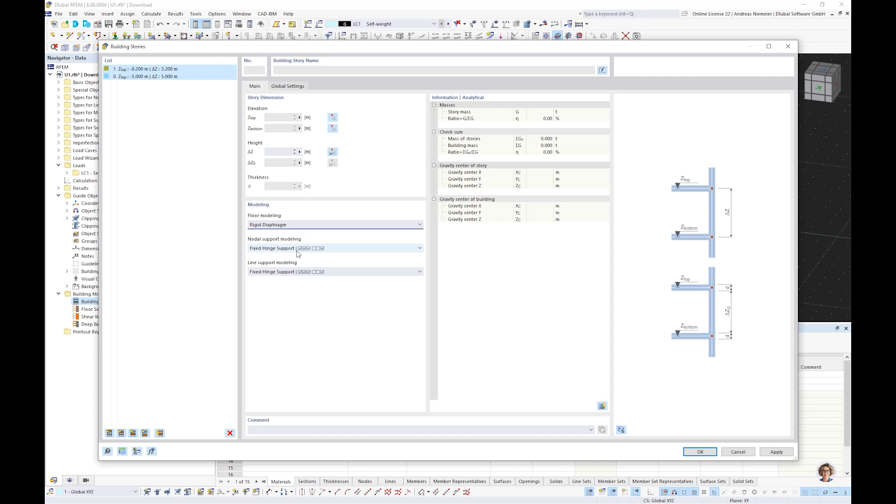And further I specify, program, please consider the floors as rigid diaphragm in the 3D structure, and additionally the slabs or ceilings of the first and second story should be supported on hinged supports. Of course you can select something else. And now I confirm, and no blinking or highlighting info will appear. You will only see in the middle a dimension that shows us the height of the stories, not more and not less. And now we can start modeling the building.

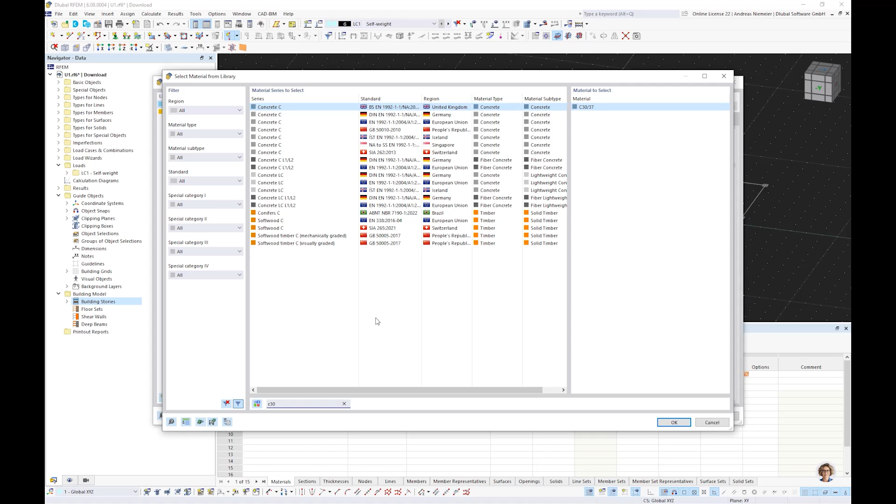For this I use, for example, the column command. We know the column should be a concrete rectangle, so I go into my library, select here a square rectangle, maybe with a size of 300 and a concrete C30. Let's select it here, C30, and you see the program directly finds the suitable concrete for this keyword, and we confirm this. It's going gray, and now we can start modeling.

The exotic thing now is, the program asks me here with a small dialog, do you want to have this column in story 1 or 0 or in both? In my case both, and now I pick it. Oh, I can't find the snap point, so like in a CAD program, you can activate it here. And now let's go to the other places, and if it's easier we can use a top view and jump around.

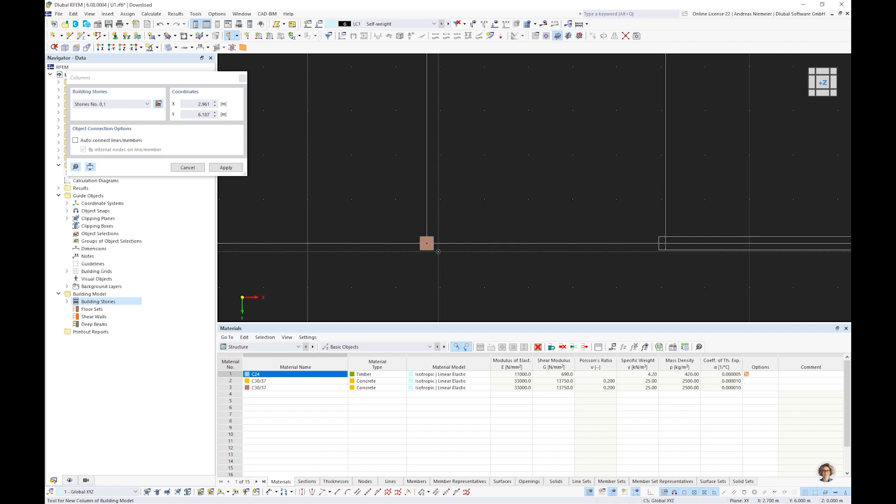Of course you can also copy if it fits. We have no rules for this. It's still like RFEM, where you can do everything in every stage, but now have a look if we change to, let's say, isometric view. Oh, maybe make this box here. You see you have the columns here, with the right length, 5 meters, 3.2.

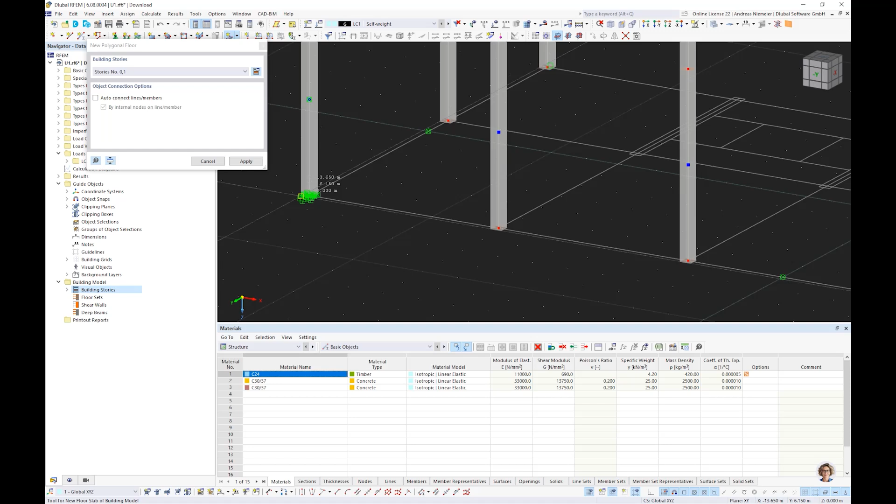The same for, let's say, the ceilings. We can take here maybe a polygon floor plate, and we specify here, for example, C30 and a thickness of maybe 22 centimeters, and go. And now let's say we pick, for example, the corners of the building, and maybe we realize we need it only for the first one and not for the others, so we can change it during picking, because the program will realize it.

And now you see we have this ceiling inside, also with the opening for the stairway. If you want to do the same for the top, we open the command again and say now maybe the upper story, and we pick the points here, and maybe this corner point here, and right click. Now we have the upper story.

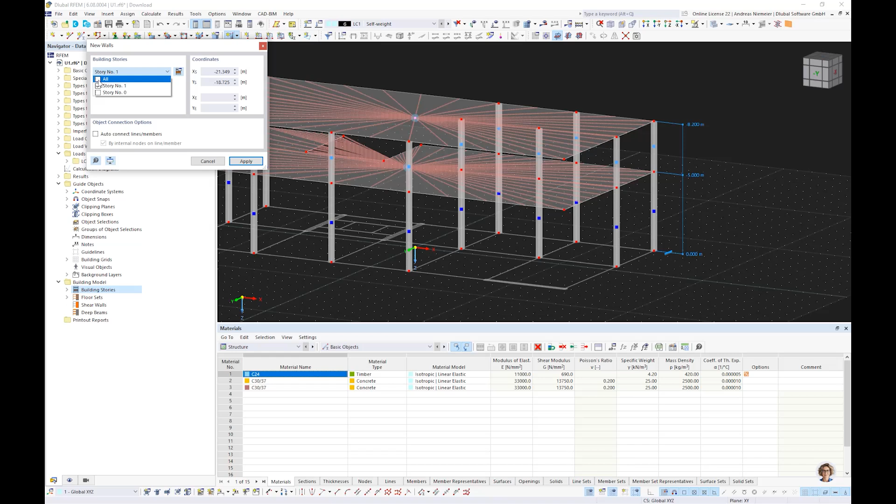And now we see, oh, we have also walls here. No problem. There is also a wall command where you can select a different thickness, maybe here 24 centimeters, for concrete. And if you pick it, you can say for which stories. I say for all. And now we define the wall should run from here to here, and the same for here to here, and maybe the last one from here to here.

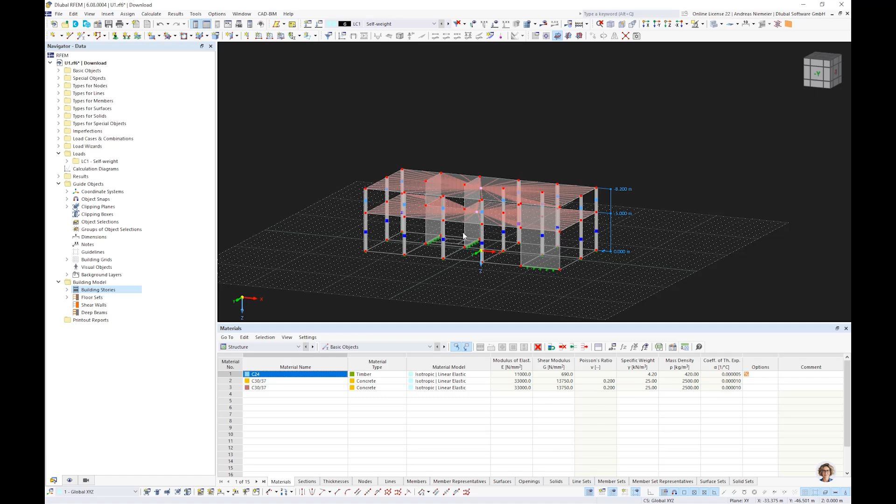So easy it is to define a building with walls, ceilings, columns, and now it works like before. We can apply supports, so for example here also nodal supports. Maybe here, so that we can grab all at once. So this is it, not more, not less. And of course we can start the calculation.

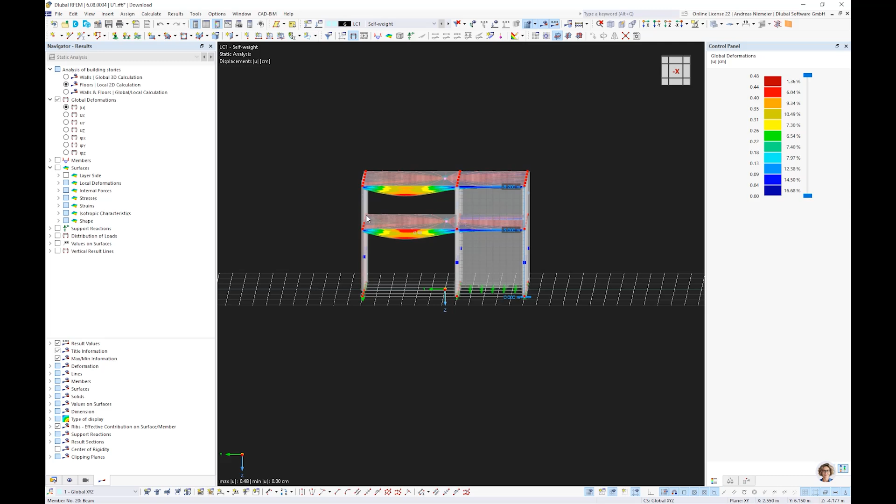And you see the program is dividing the calculation job of load case 1 into 3 parts. Why? This you will see now in the results. If I scale everything up, you see here we have 3 types of results: walls, floors, and both together. And this is now the way of thinking like a building. You have now, for example, here only floors. This means the program interprets the floors as a separate substructure. It calculates the ceiling with separate supports and separately.

So I get for these elements only bending moments, but no membrane forces, because I assume these slabs work rigid in plane, so the main structure is working, but this ceiling itself I calculate separately. And the support reactions from the floors I transfer to the walls, so that I can calculate the core of the building. This means in this model we have 3 calculations: one for the first ceiling, the second, and for the walls itself. So it's separated, and this ceiling is not hanging on the top, for example.

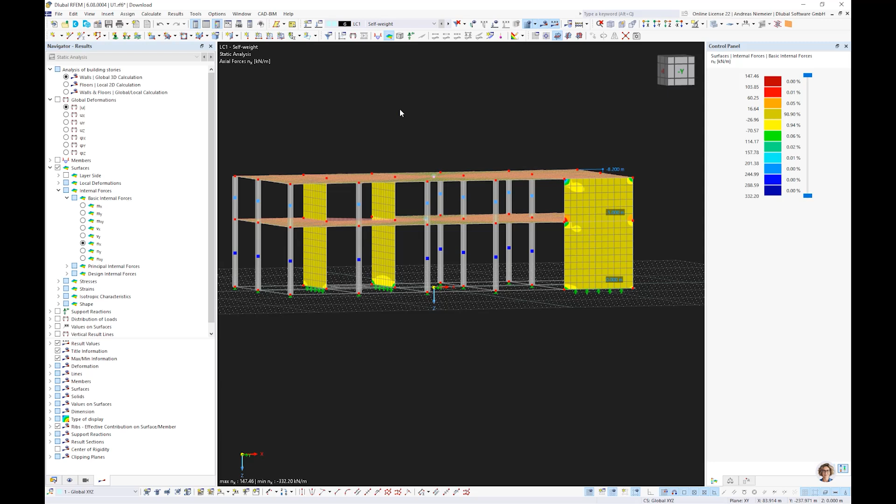So now let's extend this example, and I prepared something. So I close this and I open a more exhaustive example, called building model. So here you will see the same building with more stories, with different story heights, with a bottom floor, a ground floor, some regular floors, and a roof floor.

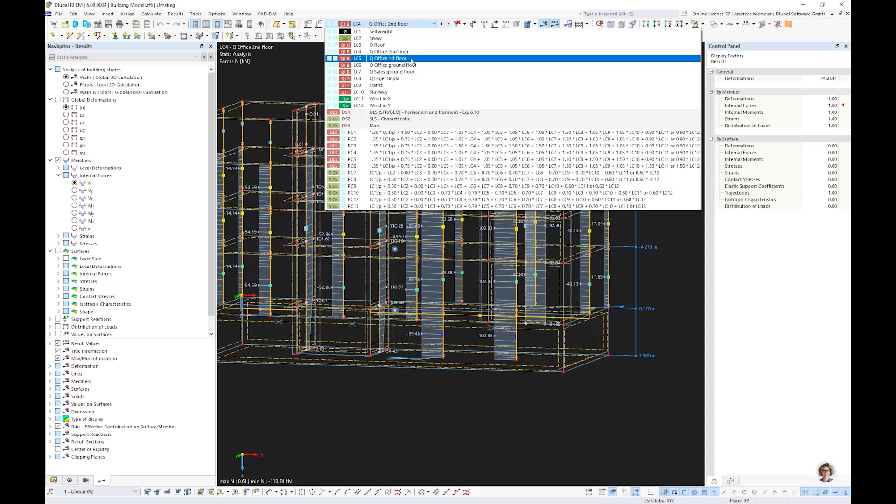And you see also here, for example, the increasing normal axial force gradient of the columns, because I'm visualizing the wall result. The columns also belong to it, and here we have our slab or ceiling, where you see the ceilings with deflection because of snow, but it acts separately. And if you visualize the normal axial force, you see the lower slab has no effect on the upper. For example, if we show a live load, you see the live load from this ceiling is going down but has no effect upwards. So with this type of calculation you can control the flow of forces.

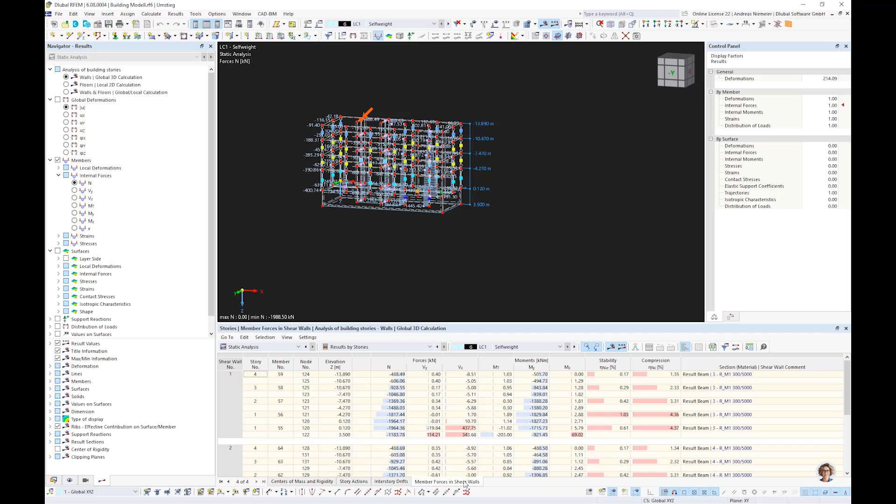Further, if we watch here, for example, again this self-weight result, you get it not only graphically, you get also a table for this result. You see here in static analysis we have the way of thinking not only for members, surfaces, solids, but also for stories. The program gives you information about the mass per story, the center of mass for every story and the center of rigidity for every story. So it calculates it in this separate task. Further, you get for every wall in this story, if you specify it, also forces.

So how you can define a wall. Here you see in your building model we have not only stories and floor sets, but also walls and deep beams. In this case I defined 3 walls. They have a section like a beam, and one wall is this, and this in front here.

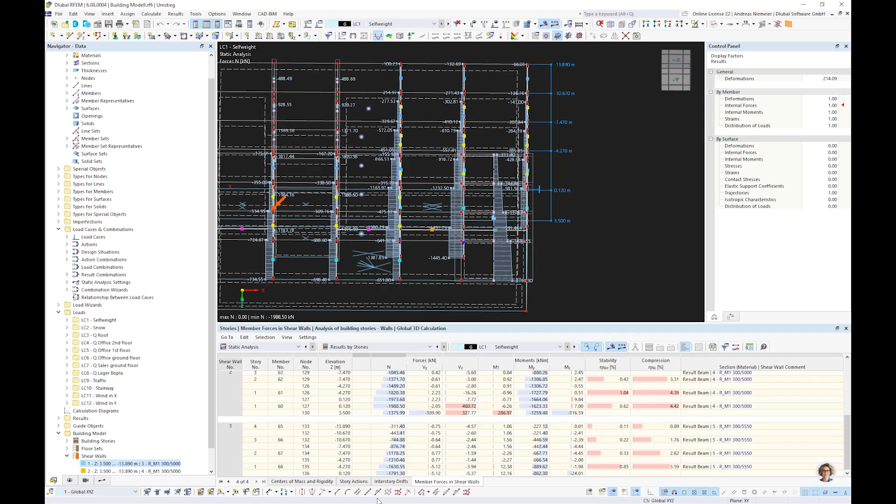And if I define it as a wall, the program interprets it like a beam. And all these forces are logged here in this table for every load case. You see the increasing normal force in load case self-weight for wall 1, wall 2, wall 3, and you get story actions.

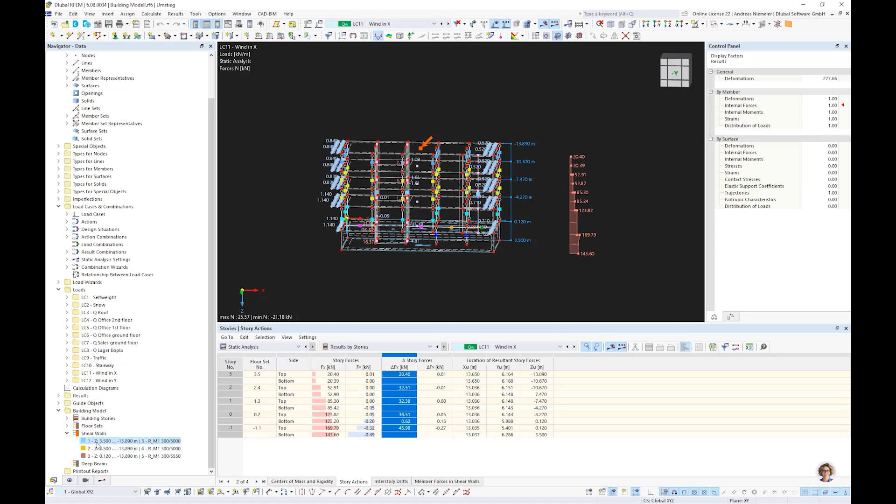If you have stories in between that need the transfer, or the reaction of deflection or the stiffness of the floor itself, you can control it here by defining if it's rigid, not rigid, or semi-rigid. So all these options are available per floor set. So this brings me to the next point.

What if you have a more complex building that is not only a story-wise building with ceiling, column, and so on? Then of course you have to take all calculation options and consider stages in between. For stages we created a further add-on, but to explain how this works, I prepared a model. I called it construction stages, and this should give you an idea of which types of issues or challenges could happen when designing buildings.

Here I have a simple building. You have columns restrained at the bottom, a beam that is supported hinged on the columns, and a timber roof that is also supported hinged here. If you look at the forces from self-weight, at first everything looks nice. You get the increasing normal force diagram in the columns. But what is a little unclear is why I get such big compression forces in the timber beams from self-weight, even if there is no load on it.

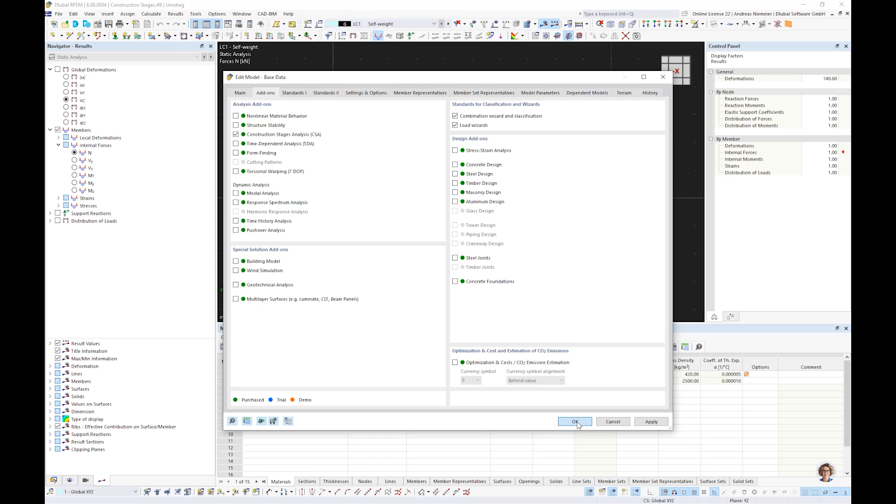This happens because the massive concrete beam is bending through, it pulls down the roof and it acts like a truss, and the result is that this truss beam here has tension, which is a little bit unreal. And this is exactly the point where you say, I cannot model everything in 3D. I have to take care of what comes first and what comes afterwards. And for this we implemented stages. Such an option existed in the old generation, but it was restricted to third order large deformation analysis. Now it's fully integrated in the program and open for all calculation theories.

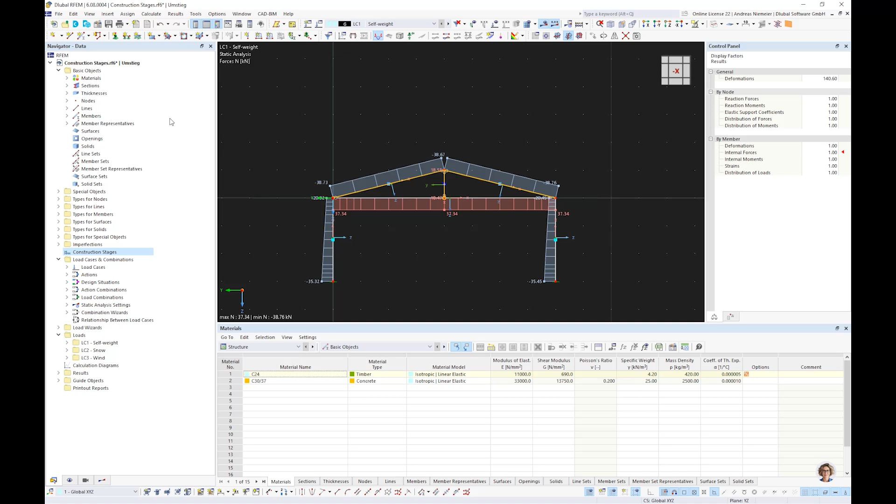How does it work? At first we make a stage, let's say column. In the column stage we have members and nodal supports. The members are clear, these 2. Supports also clear, these 2. Then we have the next stage, let's say the girder. Here we assign, it's really easy, it's like bricklaying. The next is roof. So I selected these 3 stages with these elements. You can visualize it too: column, maybe I hide what is not active, girder, roof.

Now the program has to know which loads act on it. I want to design column stage, girder stage, roof stage, and I expect that in stage 1 only self-weight and wind act on the columns. In girder, wind acts additionally, and in roof snow and wind act. And what happens now? The program creates load combinations for every stage. So you have a separate column for stage 1, stage 2. In stage 1 we get only self-weight and wind. For stage 2 we get self-weight and wind. For stage 3 we get self-weight, wind and snow. And it's that easy.

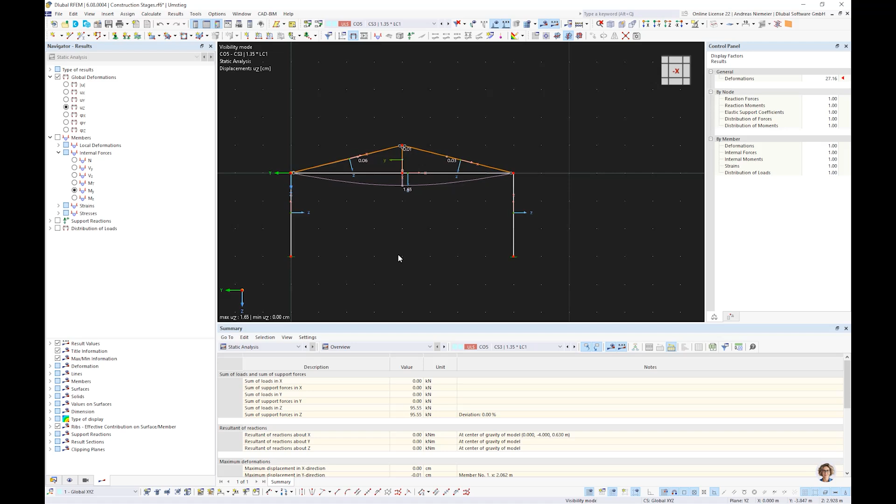So when I design this design situation, the program calculates it for every stage, and it cannot calculate all at the same time because each stage is the basis for the next. So if I calculate stage 1 only for the columns with wind, they are loaded and will be deflected. Then we place the beam on it, it will be loaded, and finally also gets its deflection. Here you also see the camber, and on this deformed state we finally define the roof for construction stage 3. And you see now in this type of analysis we have no tension force in it.

And this is what I want to show you. RFEM 6 gives you now the option to work like this. You can really define how you assemble it on your building site. And in comparison to RFEM 5, you now have the choice to use geometrically linear analysis, second order or third order analysis. It's even possible to say the stages themselves should be analyzed according to third order.

And the individual load situations on these stages should be calculated linearly. It's also possible. Then the program changes the basis of this. So, further, this was the example: think like a building and interpret it. If you, or we together,

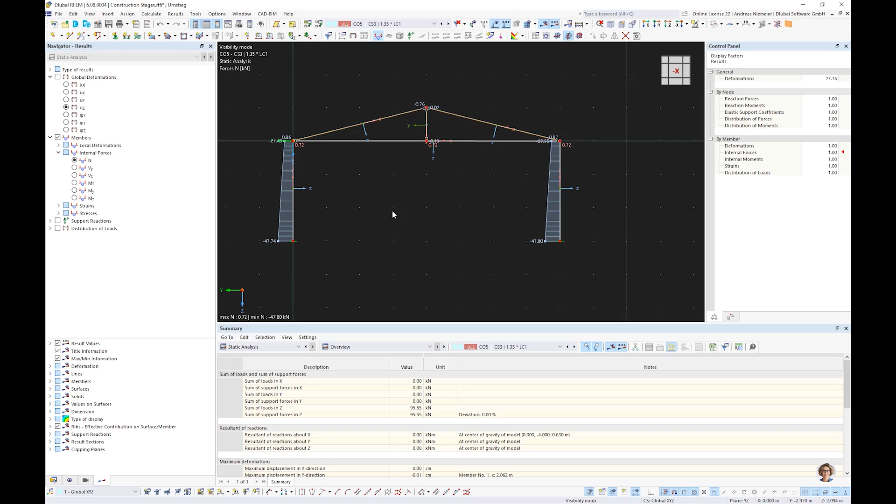come now to the next point, and this means efficient usage of couplings, because we coupled here the stages, so construction stage with load, but there are more couplings possible, and RFEM 6, or the new generation, lives from it. This means I close this example and open a new example.

What I want is to take over reactions. For this I have the ceiling above the first floor, and the second model, the ceiling above the ground floor. To use the space of the monitor, I remove the spreadsheet and organize it in these two views. So we have here the first floor, here we have the ground floor.

What is the difference? Let's go through the model. If we take a top view, you see we have a line support here, so we simulate a wall. And we have a load case self weight, we have a load here, a load here, and a load here, and all will be combined. In this model, from top view, we have no wall below, so this is one big room.

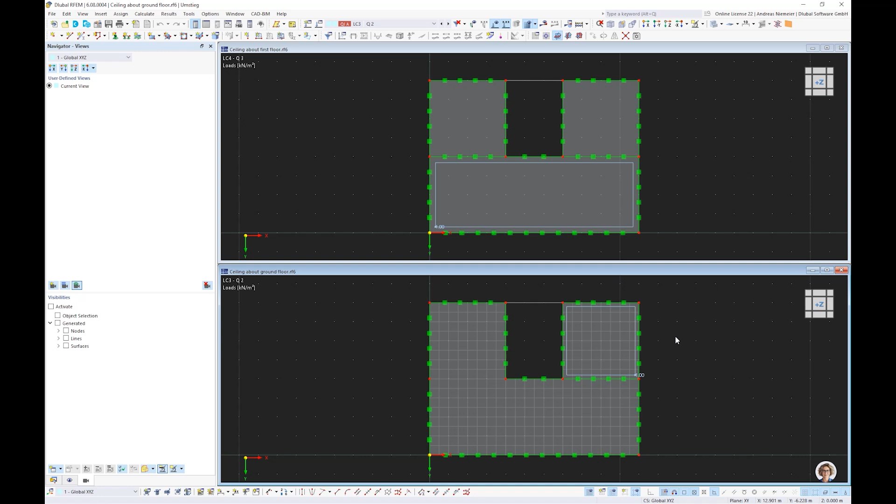And if you take a look at these load cases, we have self weight, one load for this room and one load for this room. And now the question appears: if I calculate this structure here, I get support reactions for every load case. When I activate it, we get deflections and of course also reactions. And now we have to apply these reactions on this model here.

For this, I have to think about how I want to bring it in. I have here two basic independent load cases and I copy it 3 times and say, okay, this is 3 from top, 4 from top and 5 from top. If you wish, you can also sum it up. You will directly see what happens now.

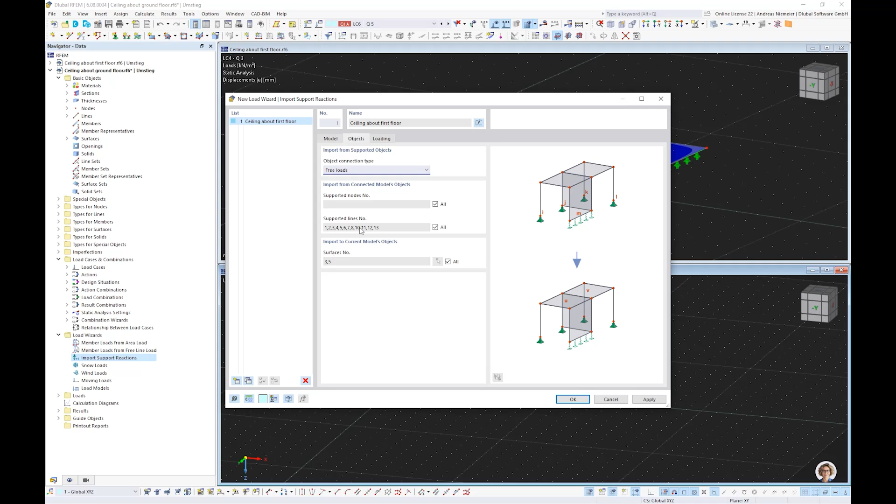You can decide whether you want to import support forces as object loads or as free loads, from all supported nodes and lines, meaning these lines and nodes, and on surfaces 3 and 5, meaning these surfaces. See, in comparison to RFEM 5 we can use nodes and lines without exotic connections.

Further, you can define the automatic transfer to load cases, which means load case 1, surface load, should run into load case 1. The other 3 load cases should run, manually, into 4, 5, 6. So here you really can decide which load should be transferred. You see the program visualizes it with a question mark, and if I calculate it, the program will take the reactions from the upper model and define them as loads on this one.

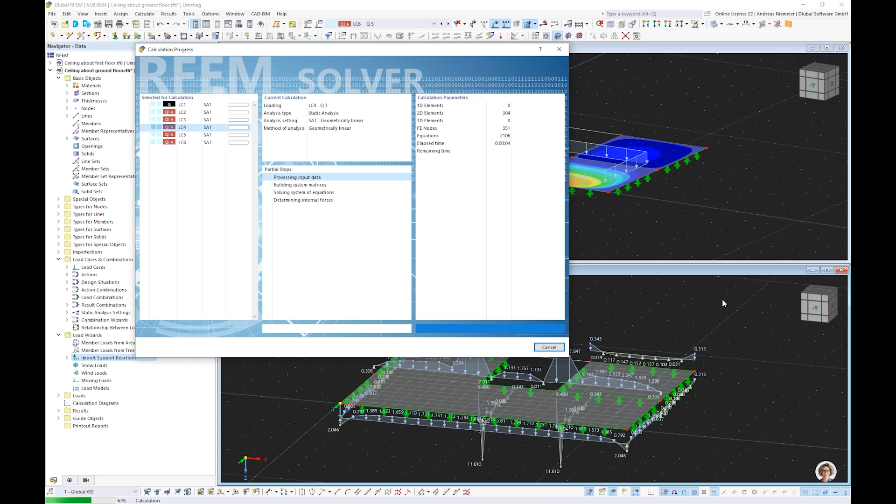Use connections efficiently. This is the point I want to show you. You don't have to write anything, it's done automatically. And what is really nice, you see the surface weight clearly, it's a permanent weight, and also in this case where we have a wall on top but not below, you get a load here as a free load. Here we have the loads from the separate load case, from this room, and from this room. And this is a really efficient usage.

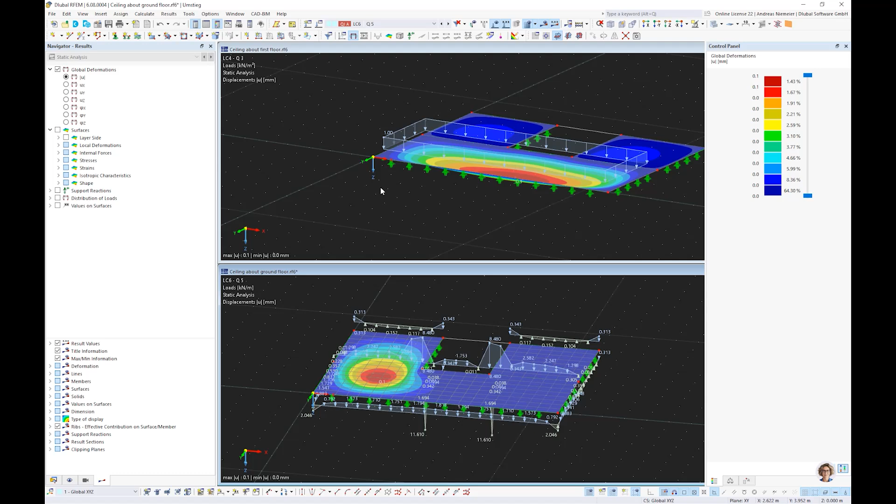And what is also really a difference to the old generation: if you have the situation, for example, in the permanent state, we have a load from the roof. So for example, I use a standard load with 1 here and here, and we also have a horizontal effect, maybe in X.

Let's use here 1, and here -1, so we have some roof load effect. You specify now in the wizard, program, please use for the permanent state not only Z direction, but also X component, and confirm it. The program wants to delete results, yes, we have to save, clear.

And now when we recalculate, the program is using the data from the model above, also the horizontal stuff. So it calculates first the floor above, and then uses these results in the lower one. And you see now in load case 1 we have also this horizontal effect in the forces.

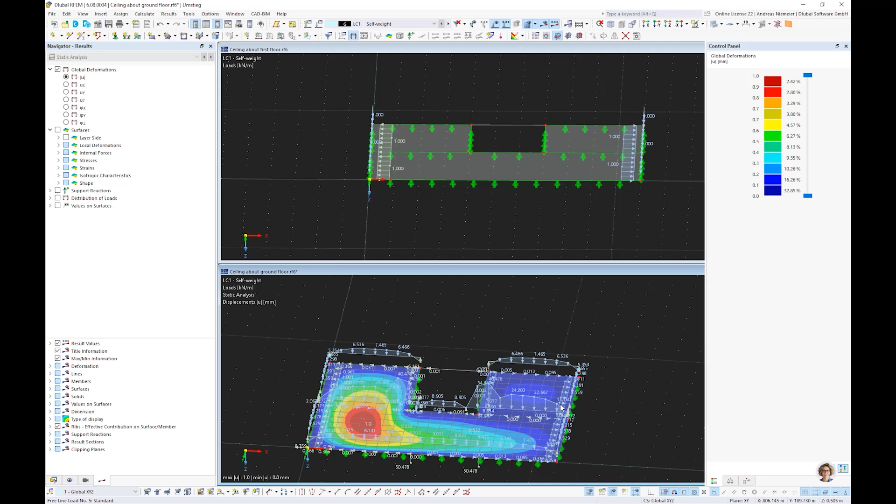So this could be quite efficient in your work, and if you say I want to freeze this, no problem, go here to disconnect, disconnect dependent model. Then the program gives you, let's say for this load case, free line loads would have no connection to something. So, efficient usage of couplings - you can use update, but you can also break the update.

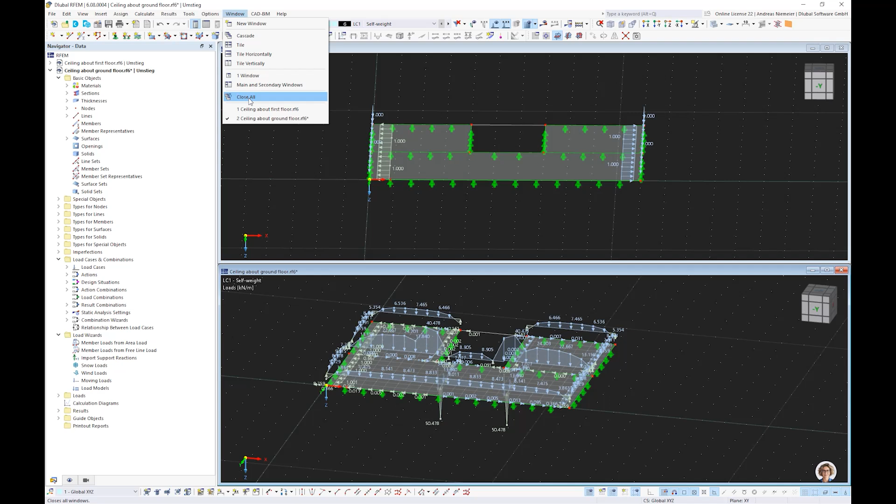And now let's come to the next coupling. Completely different topic, but it's also coupled. For this I close all and open a new scheme.

Let's say you have to design a user-defined cross-section from aluminum. For this I open our cross-section modeler. I call it UU1, for example. In comparison to our old generation, we had shape thin and shape massive, two programs. Now we have only one, and you can decide here massive or thin walled. Let's start with massive and create a user-defined section from aluminum that is extruded.

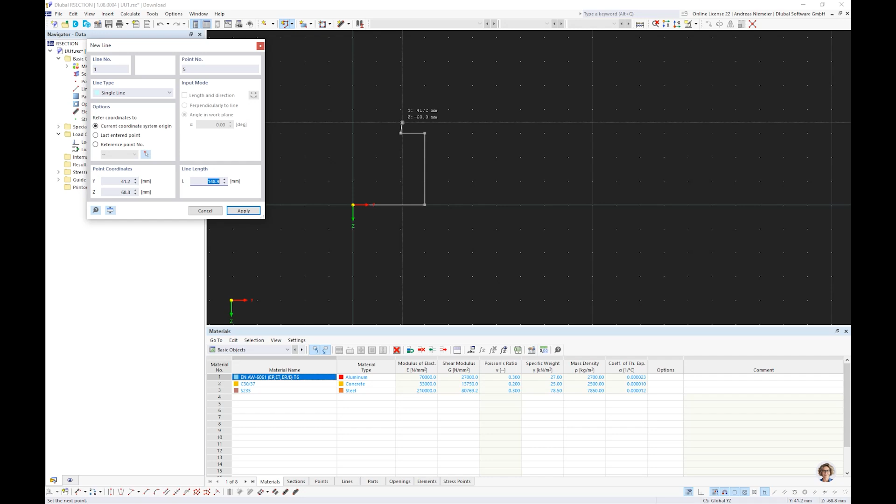For this I open it, specify the material, make a new row and write here maybe EN AW-6061 and use such a T6 material. Now we can start modeling this section, and of course you can do many things, but I use these grid points. So we have a line with 60, 60, 20, 20, some section like this. This is now a polyline.

I can extrude it, so you have functions to extrude it. Let's say we have a thickness of 3 millimeters, so we extrude 1.5 to the left and 1.5 to the right. The center line we can break, and these two lines we can select and break into single lines. Now let's say the geometry is closed. I close here.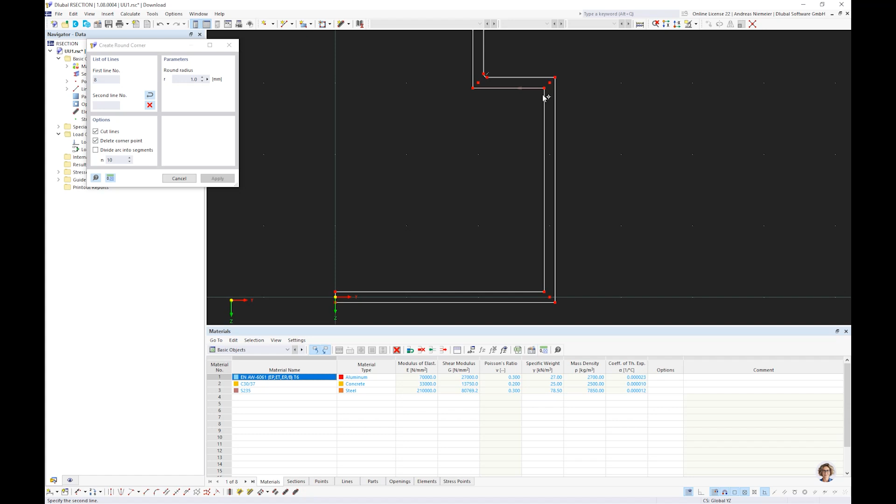Because this is manufactured manually, I have here some roundings. I want to show you these roundings because this is always in connection, or in conflict, with thin walled sections which have a striped geometry. This striped geometry is always the break between massive and thin walled. And now we reached with our developer state that you can simulate both.

So now this first part is where we say, okay, this line geometry is from aluminum, we fill it with material and calculate it to get section values. Quite easy. Now, this section could be used in RFEM, but you can't design it because the aluminum codes want to know the C to T stripes regarding buckling and shear. For this, it's no problem.

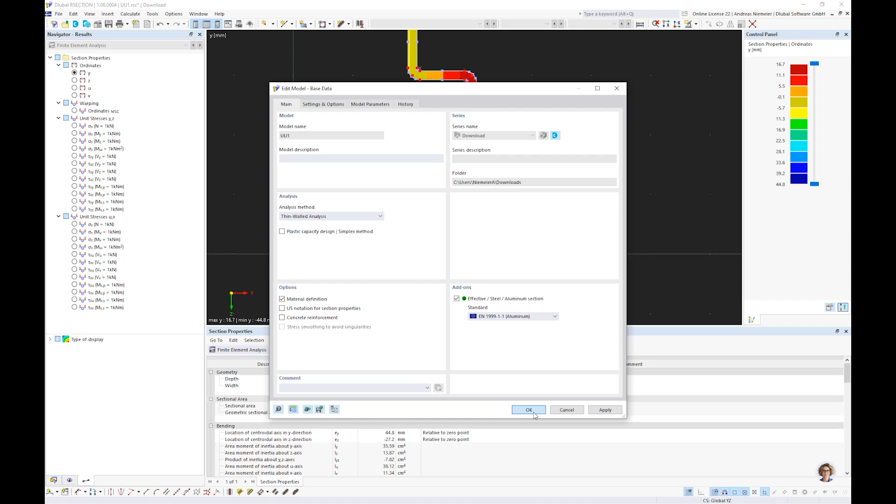In our section, you can extend it. You can say yes, this is thin walled, and additionally also aluminum stuff should be considered for the stripes. And now let's insert these stripes. We say we have stripes with a thickness of 3 millimeters from this aluminum, and we insert it, and you see they are really rectangular and have overstand.

But this is no problem because we use for this mixed calculation of massive and thin walled sections - for the bending relevant part, we use this part, and for the shear and buckling relevant parts, we use these stripes. And you see the program will move these stripes intelligently according to these roundings.

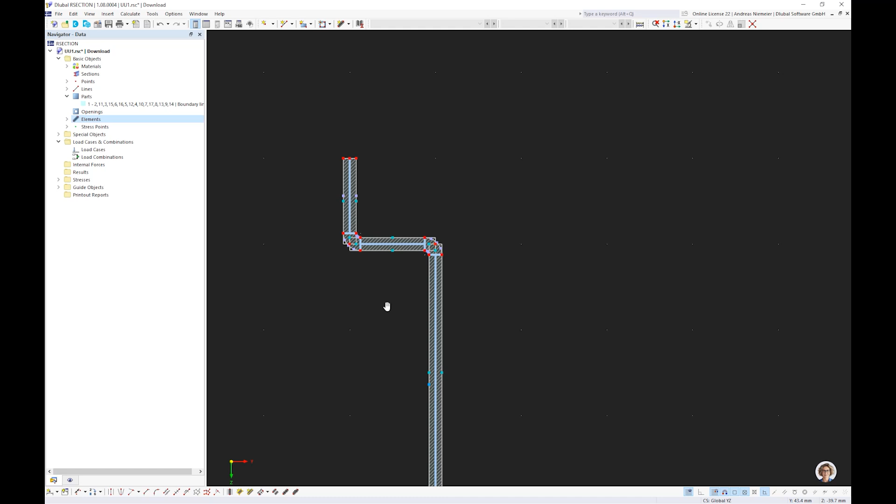So now when you calculate this, you get also section values, no problem, but then you can use it also for design, and this is the digital connection you can use efficiently. So I store it, and now you jump into RFEM, make an easy aluminum calculation, call it U7, and check here aluminum design. Let's define a new member, define here section, go to library, say I have a user defined section UU1, and insert it into your model.

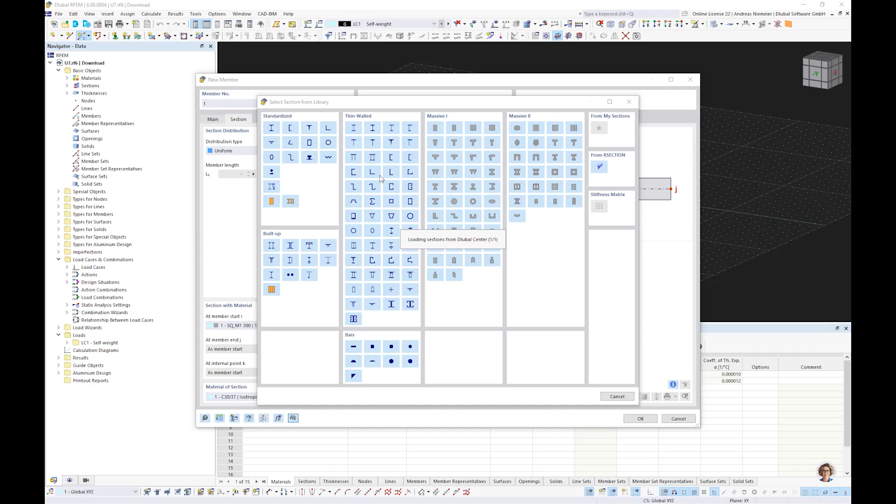The program is efficient, takes directly the material what you defined, it's hard coded, and now you can pick this member into your space. You see you have this geometry directly in your structure. For me at the moment it's irrelevant, we can support it.

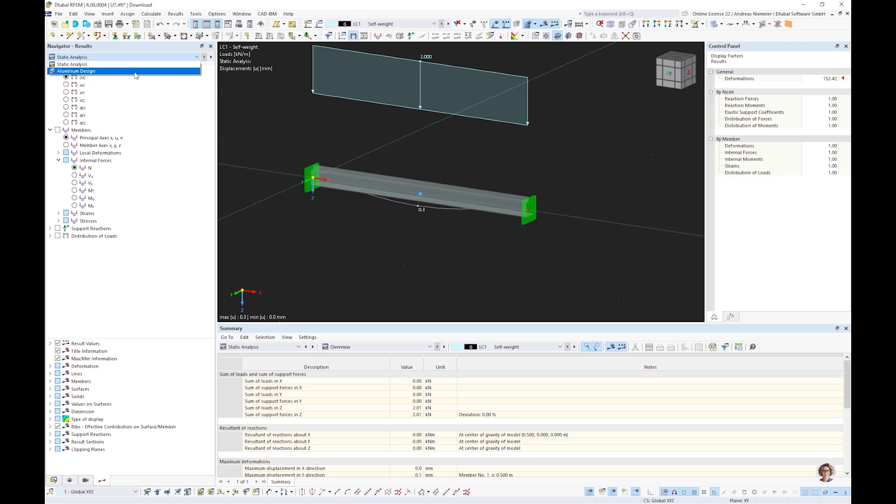Of course we can also load it, maybe let's apply 2 kilonewton per meter, and now the concept of RFEM 6 is working. You only pick calculate all, and the program does the rest. It's meshing, creating combinations, and doing the aluminum design. You see you get not only deflection, but also a deflection curve. This is pretty cool.

But now I want to show you the next stage. If you realize you made maybe an error, or you have a change, so the cross section changes a little bit, double click the member, and you have here an RSECTION button. This means the program opens RSECTION live inside RFEM in a special mode, and here you can say I have a new stripe here because I forgot it, and you add it.

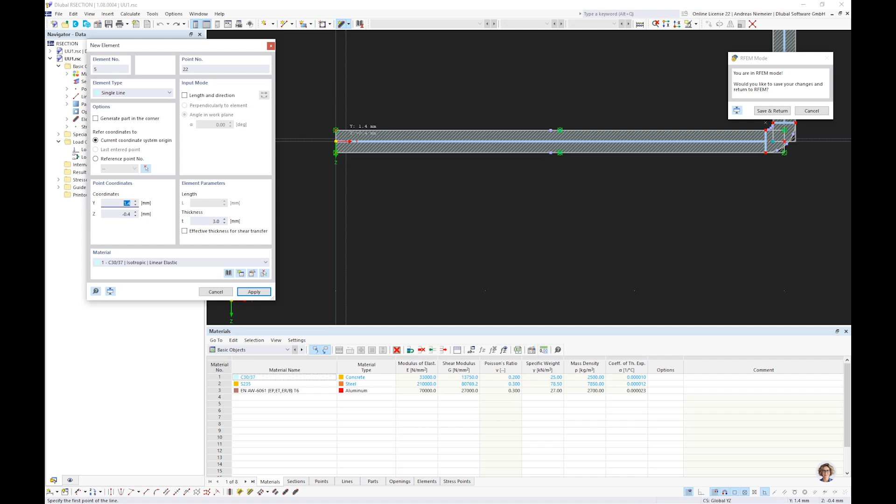Or maybe I redo it because it's not destroyed, a section from here to here. Now of course I know what I made wrong - not from concrete but from aluminum. Now the color fits.

Exactly, the program realizes it's the same material and merges this stuff so far, but these corners I don't like, because this is a little bit unnice. So let's change my view and optimize it.

I have a rounding of 1 for the inner curve, and the outer curve is maybe 4, and you see directly how these stripes are changing. And now you see this surface gets red because it still has these lines into it, so we remove it and change it to this, and now everything is fine.

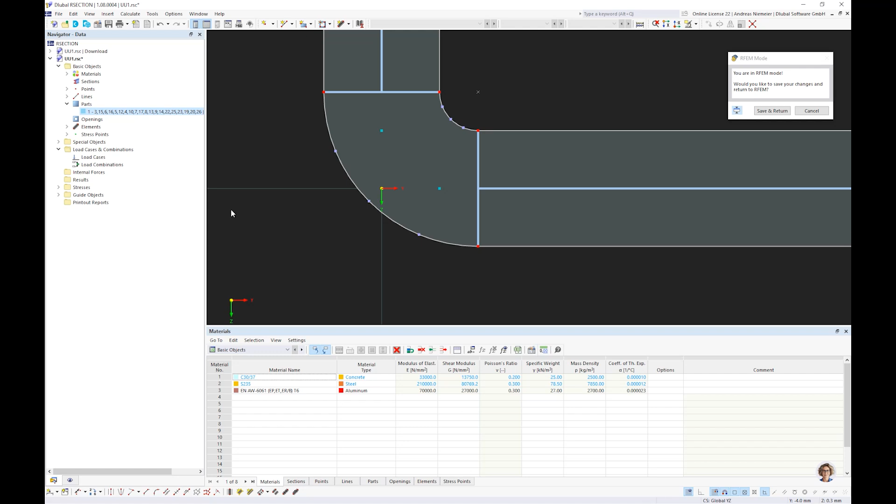This stuff could be deleted, this stuff could be deleted, and now it's ready. We can save and return, and the program updates this section. Now we have this section in our program. I press calculate all, use connections efficient, and you can directly design it.

We really invested a lot of work in this live change of sections. You can do it for all types of sections, not only RSECTION sections but also standard sections. What should help you - now you see you get directly a design course for the new section.

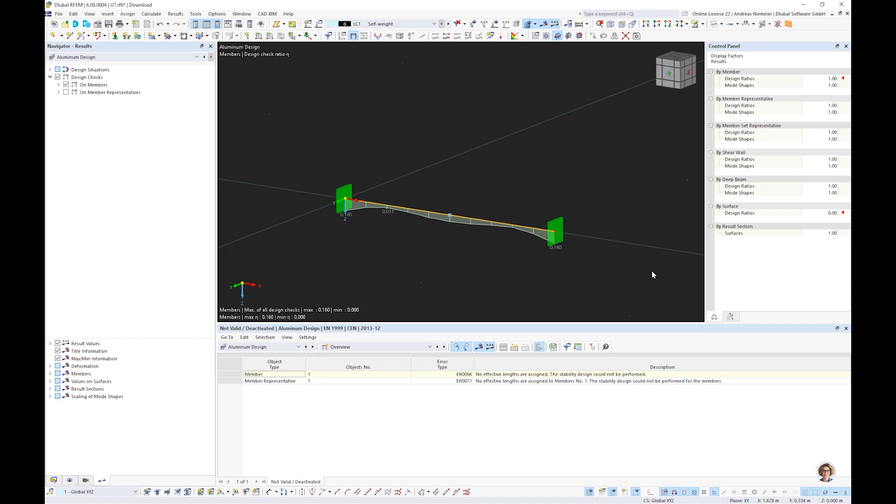So now this brings me to the next main point: what means substructures save time? Substructures - let me introduce you here. So I close this stuff and open a new model. In this new model I define at first a name, UU8, whatever, and I define here the multi-layer model. Why? You will see. So at first, our task or image for imagination: you're a designer, you have to create a story from timber frameworks.

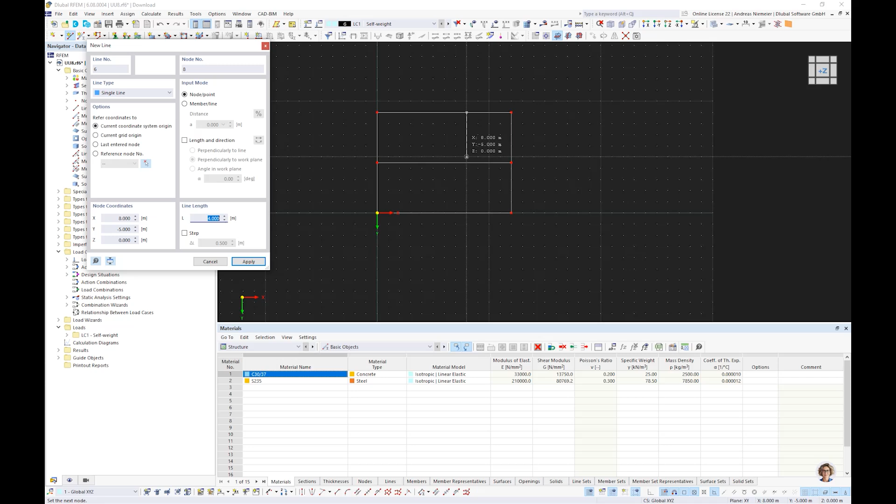Of course we can read in a DXF floor plan, but now let's make it pretty easy. When we are on top view, we can say our building is maybe typically 12 meters long, 9 meters wide. We describe it really easily with here a few lines, let's say 4 meters. So this is only my idea of an easy floor plan, not more, not less. And now we say yes, okay.

This floor plan should be created with 3 meter high timber frame walls. How can you do this? In this case, we select lines, copy, say okay, please create copied lines minus 3 meters in height, create between the original line and new line a new surface, and the new surface should be a standard surface.

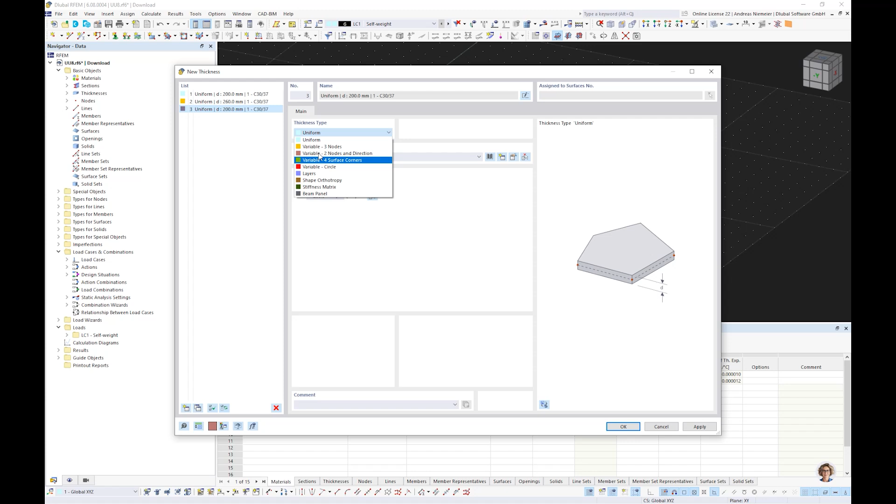Now the multi-layer add-on is coming in with a type beam panel, and here you can specify sheeting. For example, we have sheeting from manufactured timber. I select one and define this is maybe orthotropic for surfaces, and the thickness is maybe 15 millimeters. And the same I use for the other sheeting on the other side, also 15 millimeters.

And for the framing members, so the members around, I specify maybe a new section, maybe here a section from timber, new material, maybe a C24.

The sizes range from maybe 6 centimeters to 20 centimeters, so I have some space for insulation. And we can select this section for all framing members.

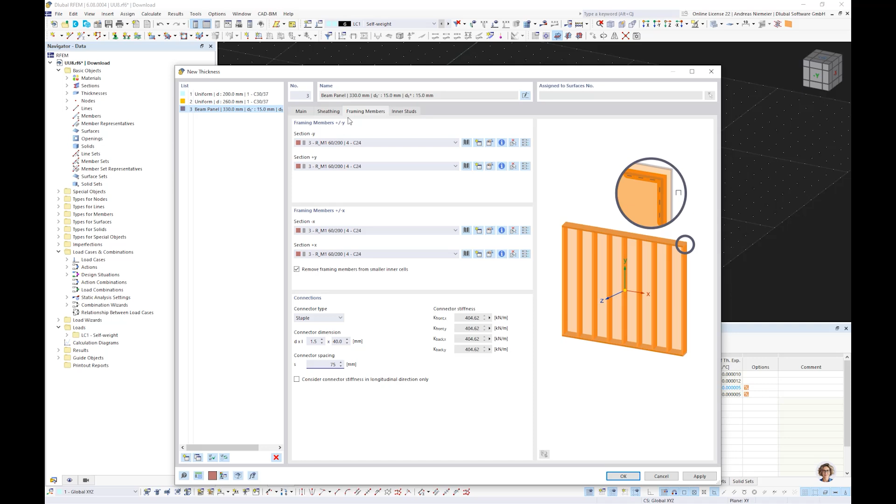Now we have to specify the connection of the framing members to the sheeting. I use staples with 1.5x40 at a distance of 75 millimeters, and for the inner studs I use the same section with a spacing of 625 millimeters, which is the width of the panels. Here we also use staples with 1.5x40x75, and from this the program calculates the spring stiffness, how it's connected.

So now we have defined the thickness, and if we copy the line one story above, we get brown surfaces. Looks really nice so far.

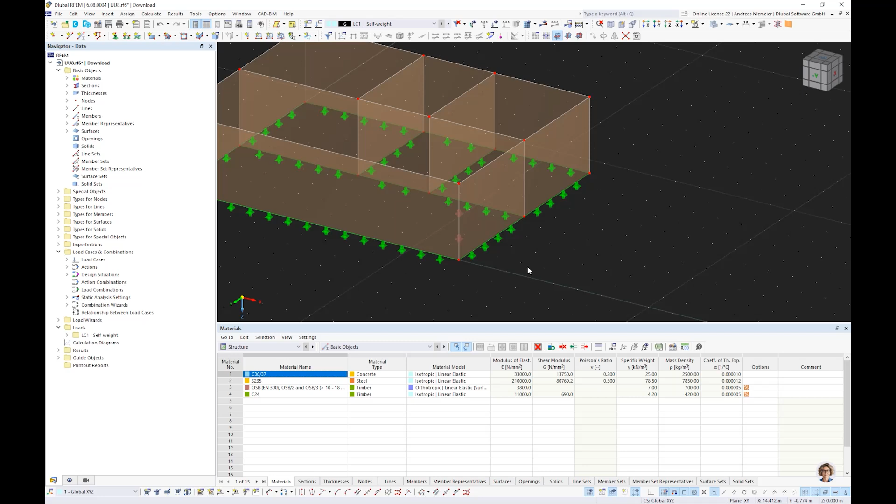Now let's say we can support it, maybe this support not. Because I'm interested what happens, I press calculate. You see the program is meshing. It needs some time. Load case 1 is calculated, and you get nothing.

Strange. Now, the idea of substructures. Of course you get support forces here, but where does the rest go? Yes, these surfaces give us no result.

Why? Because behind these surfaces we have substructures. We have here, let's say, beams with surfaces, with springs. So there's a really complex model behind, and we define it only via the surface.

And you can calculate it. If you watch the forces, these are the normal axial forces in the member, showing the increasing normal axial force. Of course you have to take more care about loading, but you see you get a calculatable model with this substructure idea, and you don't have to model it by hand.

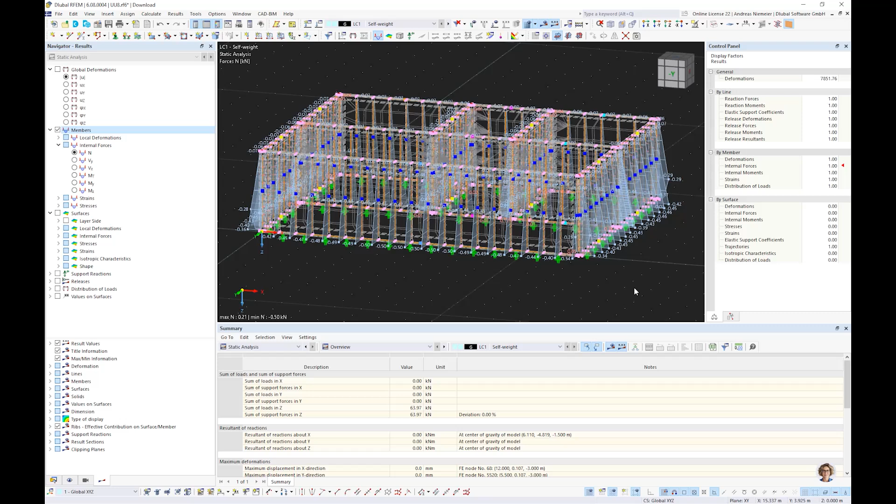We only copied surfaces. Now one step more. Imagine you have to define windows, of course, because it's really dark without windows. So let's create a window in front here.

So let's say we have maybe here a window, and yes, we have maybe here a window too. What happens? At first, nothing.

But if I define here a cascading distribution, how to say, create surface cells around the opening, if I create lines here, the program is able to make a cascading orientation or a selection of the surface parts.

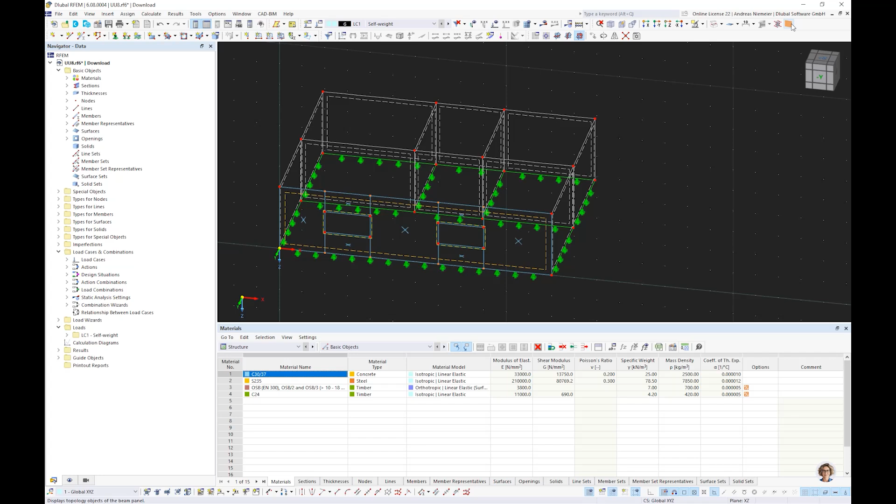And if I do this, the program is able to consider windows with a beam above and below, and also take care of the correct distance of the vertical members. So it can really be a time saver, and you only define a few surfaces with a specific thickness type.

So this is one story of substructures. The second story, also important for me, is the mentioning of the load transfer surface. For this I prepared a model, so I close it.

This was an infinite wish in the RFEM 5 generation. People always asked us in support, do you have an element that has no effect for statics or for structural calculation, but can transfer loads? And we gave tips and hints to modify the stiffness matrix and so on.

Now we have it. So if you have here a typical structure and you have to load it by snow, why not make a load case - of course we need one, so call it snow. Give it a type, but this is maybe not the feature.

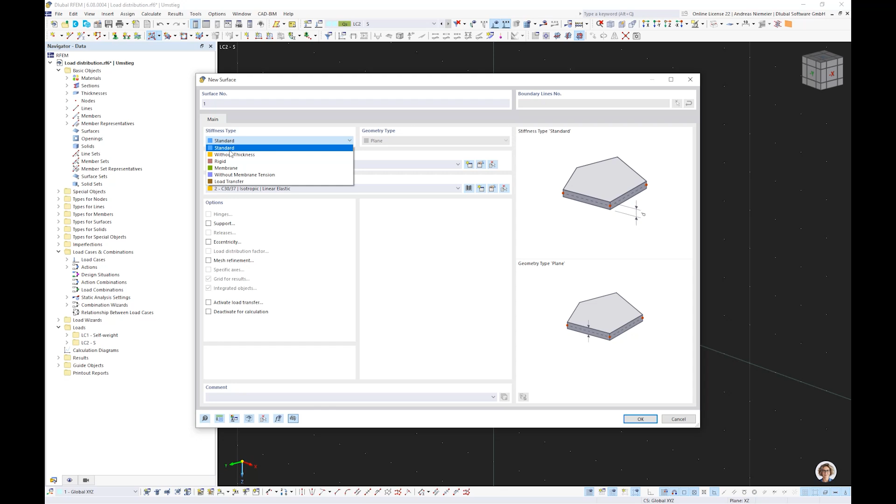The feature is that you have a surface here, maybe defined by boundary lines, with a specific type: load transfer. Now you don't have to define thickness or material, because it's not needed - it has no structural effects.

And now we can pick it. We can pick the boundary lines to be concentrated, of course. And now we have the surface inside - you see it in rendering.

And now of course you can apply here maybe a projected snow load, in standard size 1, and apply it. And if we calculate it, we get, let's say, forces on the structure, although this surface has no effect.

So pretty cool. We have no surface forces. You can watch what happens inside. You can say surfaces.

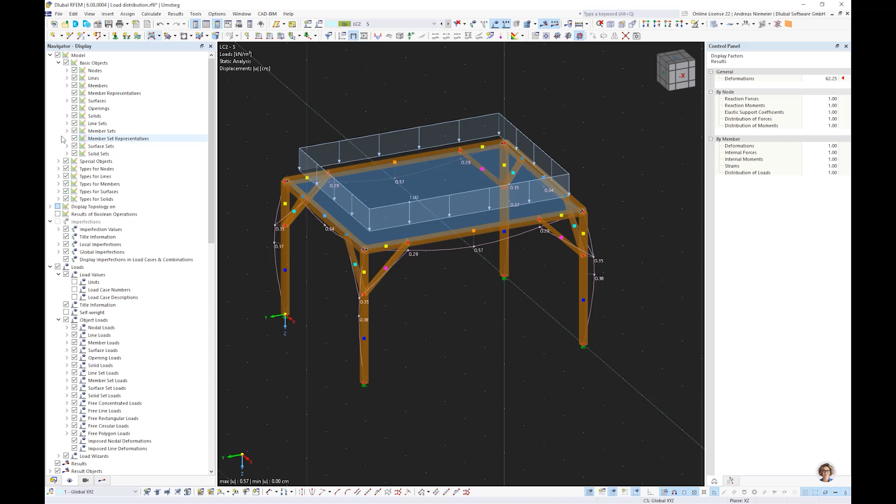You can say here maybe load distribution, and you see the program is distributing the load on the surface as a homogeneous constant load around. If you say it should act only in one direction, go into properties and say only maybe in Y.

Clear. And if you check maybe which function was here, more - you see isotropic finite element analysis. And the question appears, what is this? It's a substructure. This means if I calculate this, the program has here such a load model below.

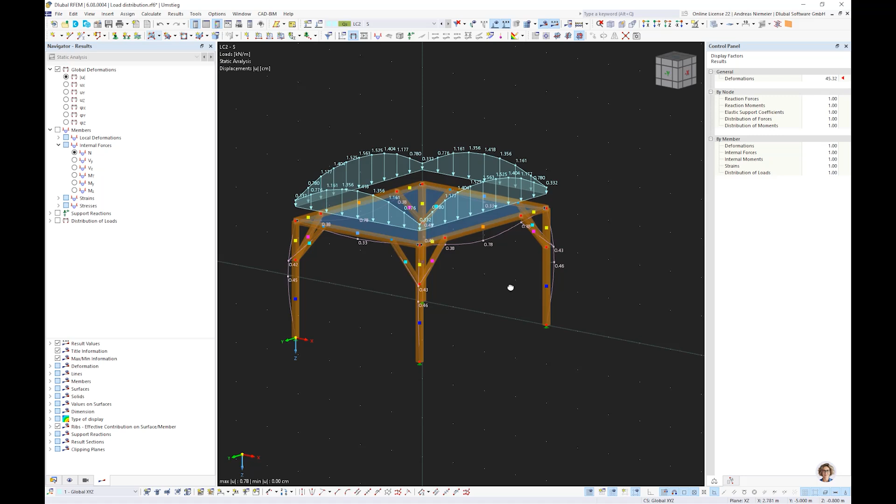This means he takes out this surface in a separate model, hinge loaded, supported hinged, calculates it, and takes the reactions as loads for this structure. This gives you a real picture of the load distribution from these surfaces.

And of course this is cool, because this surface has no effect on the calculation, so you can really rule how forces are flowing, and you can use it not only for flat surfaces, but also for, let's say, curved surfaces. So I want to give you an idea how this is working - for example, we have here a curved roof.

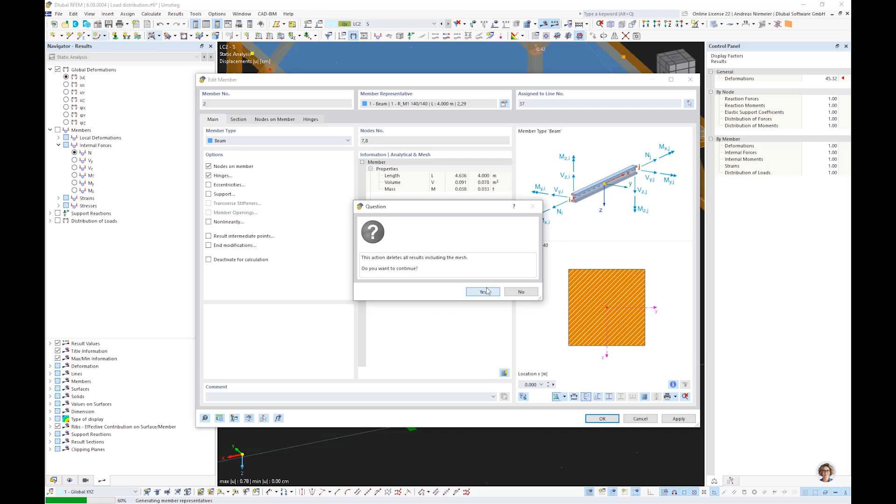So the beam is running in the right direction. This is maybe vice versa, so we change the orientation. Now we say this beam is connected to this line, and yep, so the structure is changing. Oh, maybe first we copy, it's easier. Now we can say this beam is connected to this, apply, and this beam is connected to this, and apply, and this surface is not plane, then maybe quadrangle, and have this line included.

And now we have a curved surface, and if we calculate snow load again for this curved structure, it makes no difference. The program is taking out this curved surface, calculates the distribution around, and uses the reactions as loads on this timber structure. So it's only your game, let's say it's more complex. Imagine you have to do this by hand. Substructures save time if you have such cases. So, and now I come to the next point.

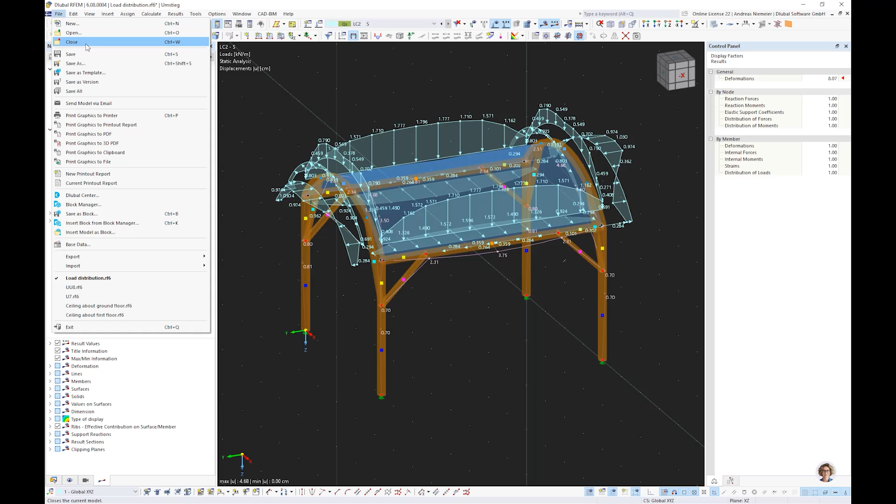Simply grasp reality. Let's say this is always our task when we calculate, how we can grasp the reality as close as possible, but as rough as possible. For this, we extended our new generation with a few tools. Maybe the most famous one is here. So I have here one. Where is it? This is it. I don't find it. Torsion. Member torsion, yes.

So here's a really easy structure. I think everybody would at first say, yes, I calculate it by hand. Simple beam, I-section, pinned, supported against torsion here, with a main vertical load and a smaller horizontal load. What happens if we calculate it? We get here a few forces. Of course, we get a deflection. So we have a vertical deflection, 1.9 centimeters.

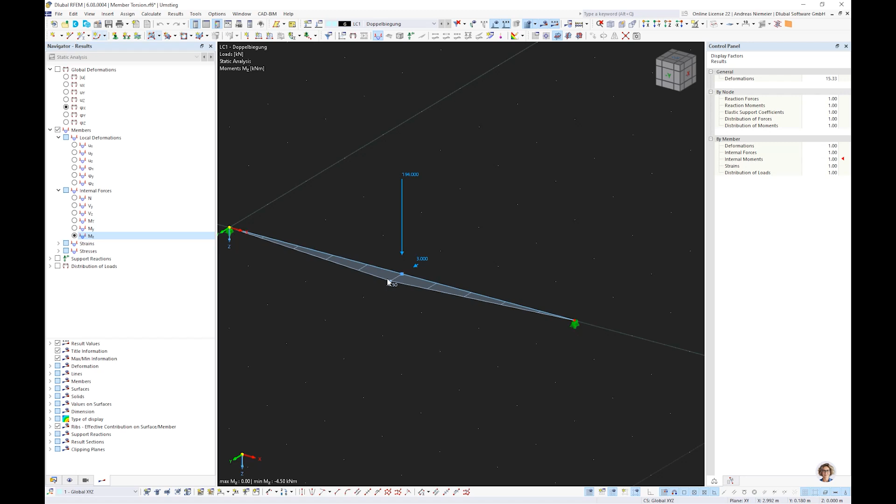We have a horizontal deflection. We have a bending moment. We have a bending moment in this direction, 4.5. Take a look. This ends up in a stress, just so you have something in mind, an elastic stress of 280 Newton per square millimeter. And what is also interesting, imagine we have here a pinned support, a fork support. We have biaxial bending, and I would expect also torsion, but torsion is 0.

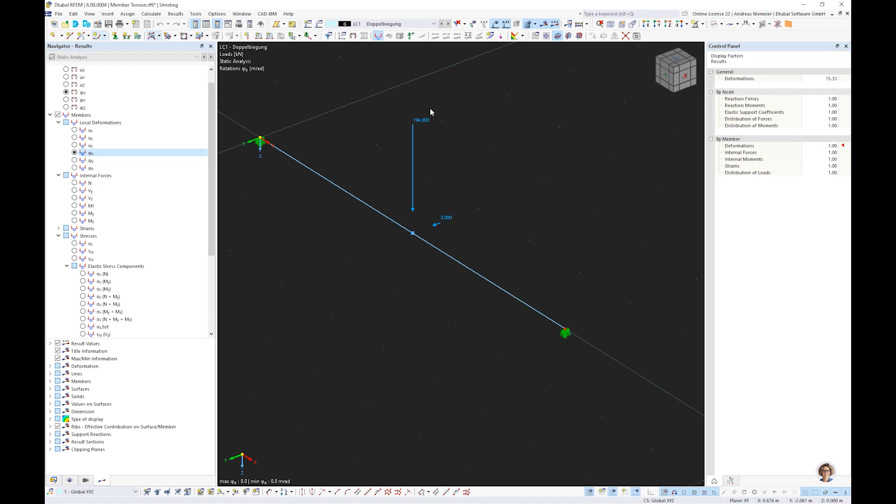Now my question: of course, the bending moments seem to be real, the deflection seems to be real, but the torsion is questionable. Why do we have no torsion? Maybe we have to activate in static analysis a few more checks or options. So let's say calculate according to third order. Third order large deformation analysis is always able to consider all effects. Could be. Let's try. Calculate.

So you see, meshing, static analysis is running. It seems we have some effects, and you see the solver also has some oscillations in it. Let's take a closer look at the results. And wow, we now have a rotation of 845 millirad. Seems to be pretty big. Bending moment MY is clear, but now we have 220 kilonewton meters in the horizontal direction, from 4.5 kilonewton meters. Sounds a little bit strange to me. And even stress of 1616 Newton per square millimeter. Wow. So it seems to me like a bug.

But you always have to grasp reality. Is the program able to consider this effect here? We have an open cross section with biaxial bending, which should induce some torsion. And the challenge is the program knows only 6 degrees of freedom. It has no warping stiffness in it, and without considering this warping stiffness you are not really able to model such stuff with members.

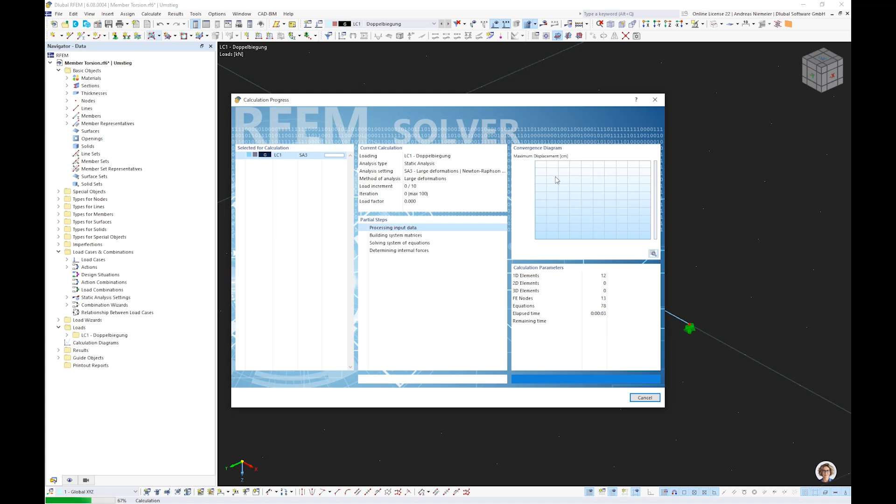So our team implemented for you in RFEM 6, and this is really new and gives you many more options, the warping torsion, the 7th degree of freedom of warping, into the main calculation. You can connect it to first, second, or third order as you wish, in branched models or only in single-member models. And if we calculate it now, you will see you get results that fit a little bit more. Now we have an elastic stress of 527. We have a torsion of 81 millirad, so much smaller. Bending moment MY is the same as before, and horizontal 28, so much smaller.

And we also have a warping deflection at the ends of the supports, and we have a primary torsion and a secondary torsion plus a warping moment on the structure. And by considering the warping plus primary and secondary torsion, we are able to capture all effects that happen, and we are able to calculate as close to reality as possible. And this can be connected to first, second, third order analysis. So this is what I want to show you, and you are able to do it now. You can use 7 degrees of freedom in a member structure connected to shells in RFEM. This is really new.

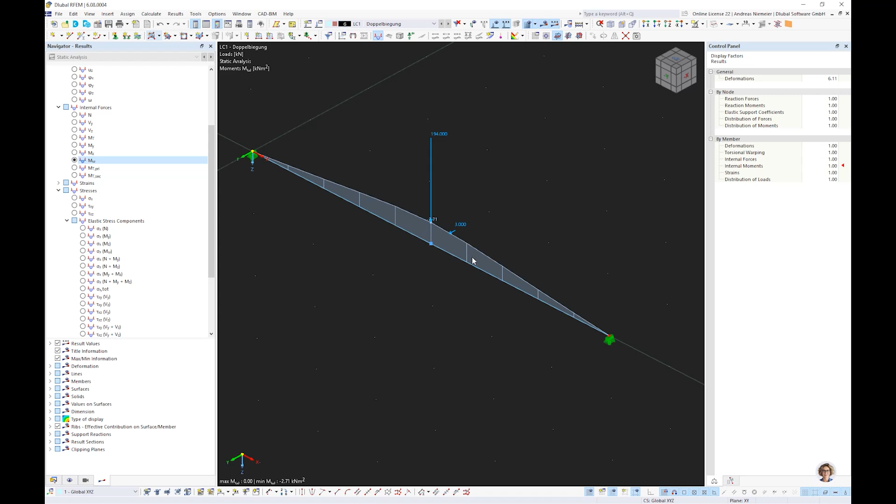Now I want to come to the next point regarding simply grasp reality. And here, let's say I open a new example, especially regarding connections. So I call it joints design, and my example is as easy as possible. I have 2 beams, 1 girder. You see only 1 load case, but this is not the interesting stuff. I have only 1 load case to have a calculation as quick as possible.

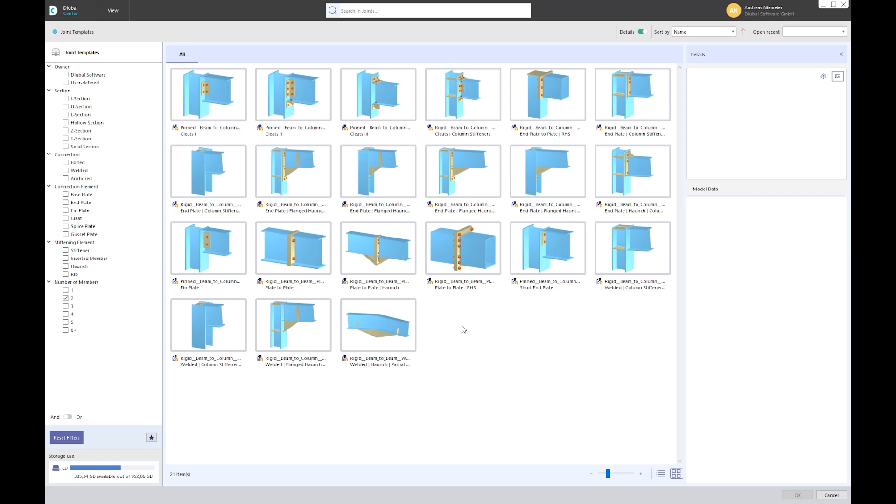And for this job, we have created an exhaustive add-on called Steel Joints. And if I use this, I'm able to say on these nodes here, I want to create a joint. I can select again nodes from template now. Make it different. Right click. Now it's working. I have a really big library of connections, and you can also create user-defined ones, but here it gives you a first idea.

For example, here we select this example and say, please assign this connection to this frame joint. Of course, the program is doing it. It thinks, because you have to adapt this template to the new section sizes. And now we confirm it and say, yeah, looks good. This looks a little bit strange, so I don't like it. I modify it. I grasp reality. So I say I want to have here a cap plate on beam 1, and then I think it's more like I like it.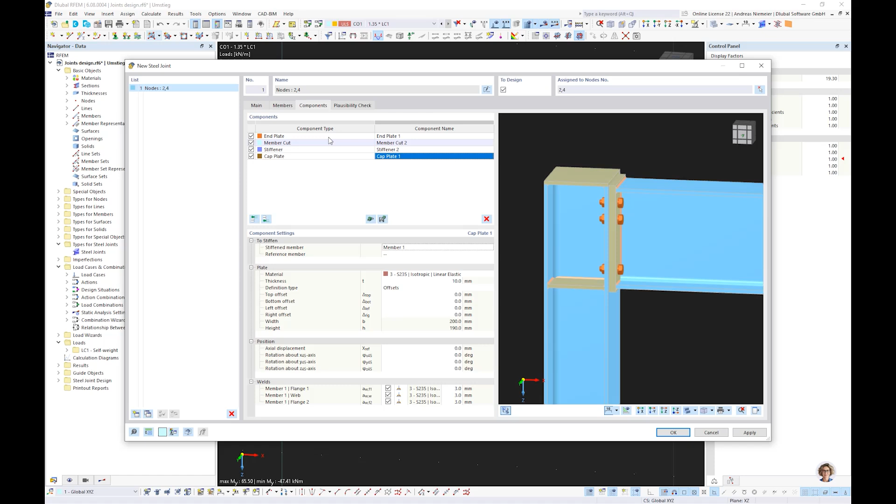And now we grasp reality, we can specify weld sizes, everything, but here we can also say we want to do ultimate limit design, but also stiffness analysis. And we say, please make an interaction with the main structure. Calculate initial stiffness and generate hinges in the main global model. And with doing this, I have to tell the program to do it for member 1 or 2, and I say, please, for My for member 2. And now we can start calculation, calculate all.

And of course, I know this takes a while, but in comparison to RFEM 5, you have now a lot more options. You can define now the connection like it is. So do we have a cap plate or a stiffener? Do we have different bolt distances? Do we have weld lines? Do we have on every element a weld line? Is it bolted? Is it welded? It's your game. You can decide it.

Additionally, because this technology models behind it a shell model with nonlinear material law and checks in the end the strengths, this allows you to apply normal force, shear force in Y and Z direction, torsion moment, My and Mz bending moment. So you can apply all forces. It's allowed, and we use this with this concept. Further, you can analyze not only forces but also unit deflection. So we can calculate stiffnesses from it, and now new also assign them to the global model.

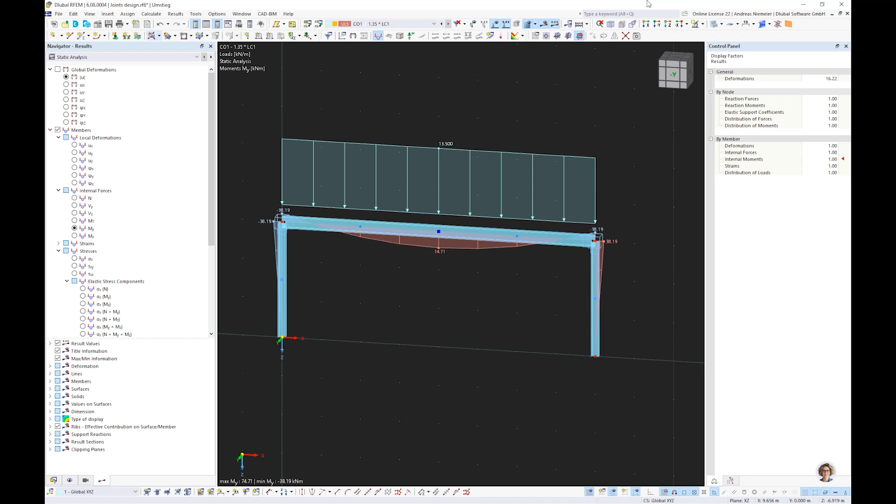And now you see what happens. We get in the joints design. So let's open tables, go to the joints design. You get a utilization. You get the design check written directly here for all that are done. You get a stress and strain view of the connection for every element separately. You can say, show me plastic strain, show me equivalent Mises stress.

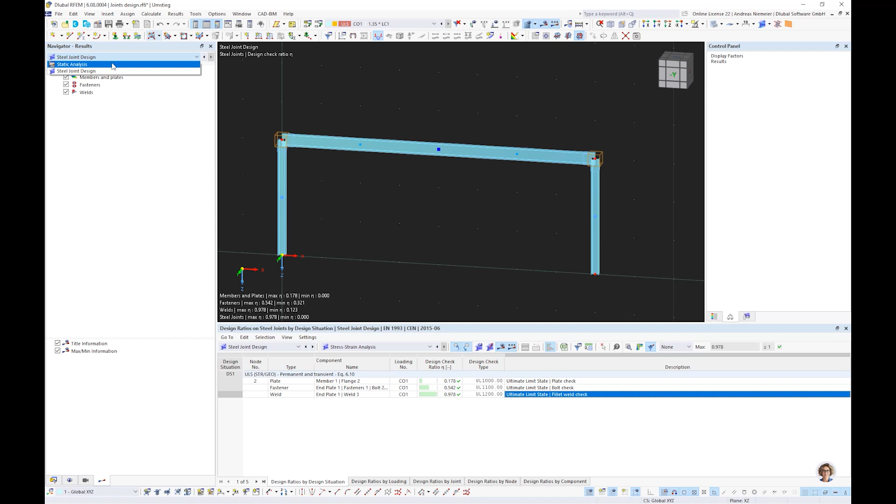And finally, you get also here hinges on the end of the members. So you have here member hinges where the program writes the diagram, the response diagram of the connection to the model from the stiffness analysis. And if you watch now the result, if you go here to static analysis, you see before we had here 65, now we have 74, and here we have 38. So this part is increased and this is decreased. So you can grasp reality now, interactively.

And this brings me now to the last point of my part today: evaluate results in a targeted manner. Still a pompous title, of course, but I want to show you which work our developers did for you, so that you have an easy game in checking models. And for this I prepared here a structure. Where is it? Something with diagram. It should be.

Here, calculation diagram. And let's take a look at first the model, so that you see what we are doing. So this is a simple beam with a transversal load. The beam is modeled from shells. The web has a thickness of 6.5 millimeters. The flanges have a thickness of 10 millimeters.

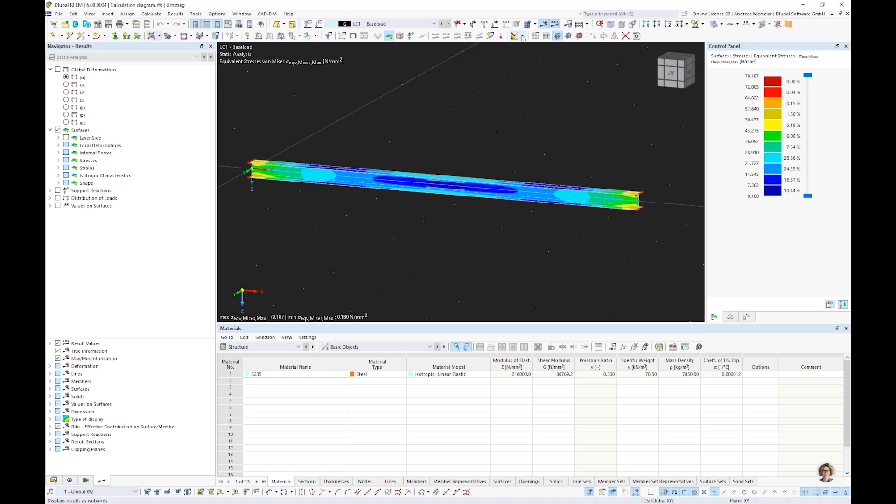Now let's say I want to give you a picture of what we want to do. Let's say I want to try to find out the carrying level of this beam, which means how much load we can apply. Let's calculate to the plastic resistance. For this I activate in the add-ons the nonlinear material behavior plus structure stability.

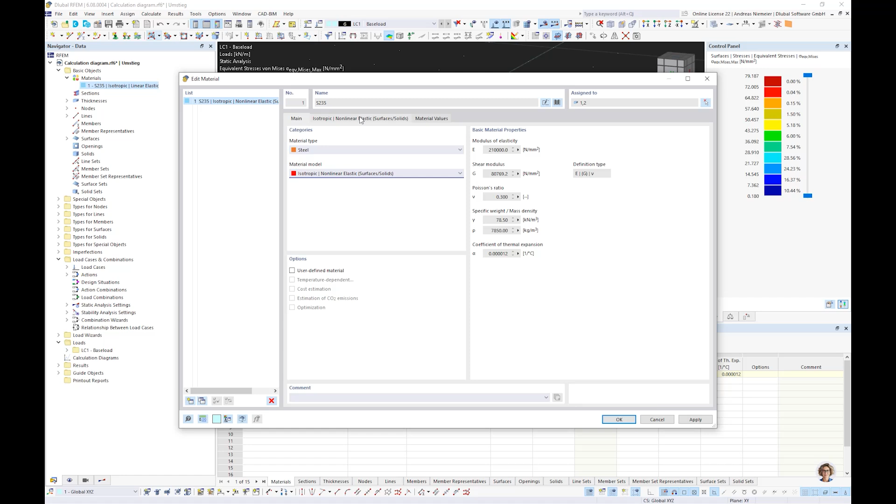Why nonlinear materials? Because I have to change the material to be not linear isotropic, but nonlinear elastic for surfaces. What does this mean? You can select here different diagram types. I take the easiest one, bilinear, and then the nonlinear elastic diagram, at first with standard Young's modulus and then with a hardening modulus, and we yield at 235 Newton per square millimeter in the von Mises format.

What happens if I confirm this setting? Of course, results will be deleted. I can calculate again and get results. The same, because we changed nothing on the load and it's still elastic. So now let's try to come into the nonlinear elastic part to get some yielding effect.

For this I take this base load and activate here stability analysis, and I don't want to calculate buckling or something like this, I want to increase loading stepwise. For this I take the incremental method without eigenvalue, and define here some parameters. My starting load factor, maybe we increase it always by factor 1. Refinement should be done with 5 in the last step, and we want to have maybe 10 increments.

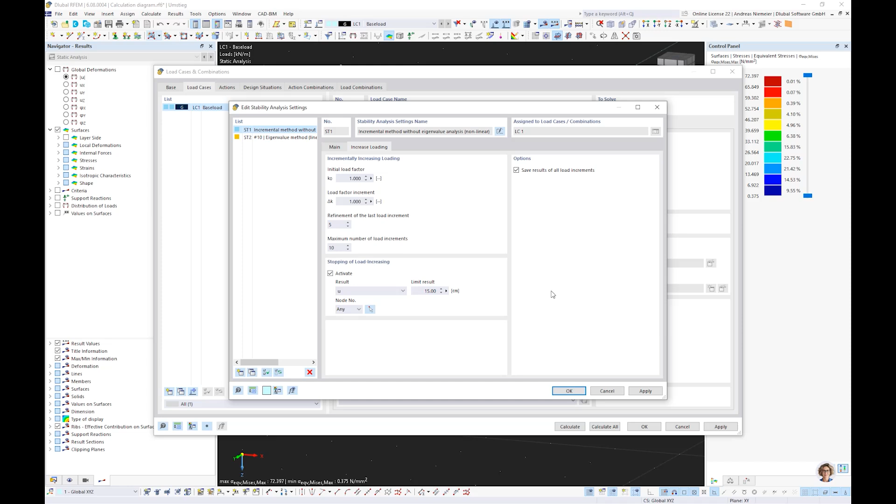And because it makes no sense for me to calculate deflections from here to the moon, we say let's stop at 15 centimeters max. And because this could be one process that gives me a load increasing factor, but I want to look inside this calculation, I save the results of all steps. And if we do this, the program has 2 steps: one for static analysis for the 10 kilonewton, of course, and the other is the load increasing step.

You see now how we increase load stepwise. Now we come into this yielding effect. Of course, we see only the diagram now, not more, not less, so we cannot decide what happens. But later we have to look into this result, and because we store every result separately, we have the chance. Of course, such a function works also in RFEM 5, but now we created something around it that makes this easier for you. Now slowly you see we have an increasing gradient.

We are here at 10 centimeters, so slowly these reactions are uninteresting for me. We come close to the 15, and you will see what happens when the 15 appears, so you have full control. And now it stops and tries a second look if it works. So it tries again to load it in the last increment. The load factor is already reached so far. You can watch it during calculation, and now I think it will learn it makes no sense and stops calculation.

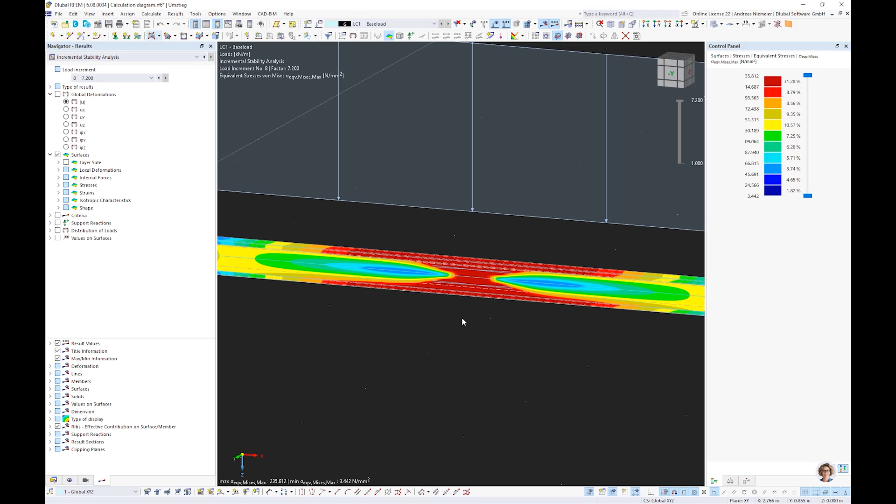So this is connected to the stability add-on. Only a robust function in this case. But what is now the change? In this view, nothing. Of course, we have to change here to incremental method. And now we get a really interesting picture. Red in the middle, red on the right and left side. Seems like a plastic bending moment. Plastic load distribution. The same here.

What is also new? You have here such a scaling factor. You can say this is load factor 7.2, this is load factor 1, what we saw before. Maybe you can change directly here in between.

Further, you have the same box of this factor here on this result part. You can watch all results. The result we're just seeing is the Mises stress, so we have the stress 235 here in the limit that we defined for yielding. What I like more is the criteria, because then I'm independent from the defined limit stress, so yielding is defined with factor 1.

So if you want to analyze it over the length of the model, how can you do it? In this case we have these result cuts. We can say please cut, for example, only this surface, and of course we have to define it from the middle to the other side, and we should visualize this result in y direction. Now you get the diagram here inside.

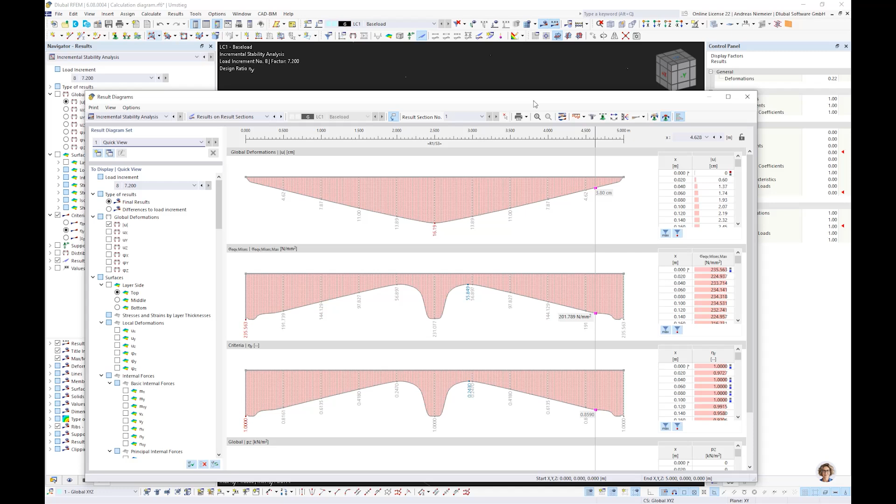Of course you can hide this and you see it much better, but what I like more is to select it and to jump into such a result window. And this is now non-modal programmed, which is new in comparison to RFEM 5, because you can work at the same time in RFEM itself if you have 2 monitors.

And now let's say we want to see deflection, maybe here U, and we want to see here criteria eta. And again you get here this increment bar where you say okay, this is load increment 1, then 2, no problem, 3, slowly we come here to the limit 1. Now you see you have yielding slowly, and now suddenly here it's reached, and in the middle it's starting, so you can analyze it quite easily.

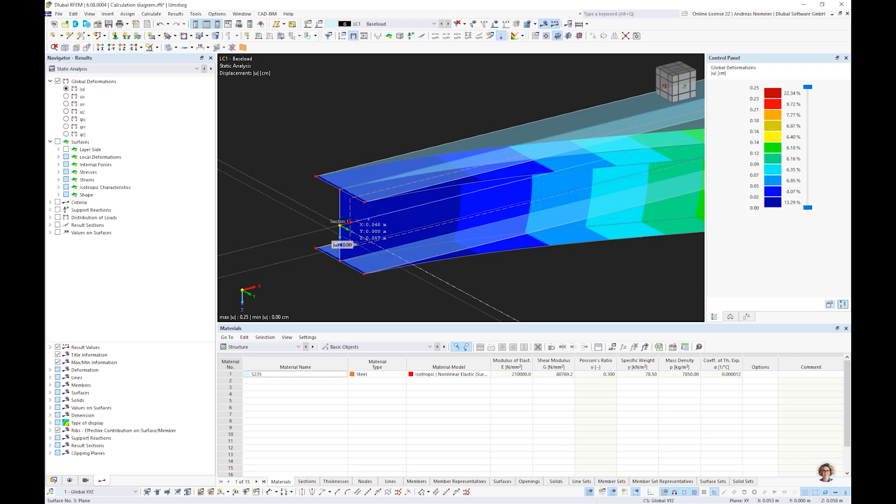And additionally, what is also new now: maybe you know it from RFEM 5, that you can hover above these surfaces and pick something. I pick now one at the beginning, and I can pick one in the middle. But for me these points are quite randomly placed, so I don't like this. But now in RFEM 6 you have the option to say, hey, these are result points for surfaces.

They're stored here in this list, where you can specify them, and you can say, okay, the first one is maybe placed 1 centimeter inside the beam and in the middle, and the second is maybe in the middle of the beam, 2.5 meter, 0 and 0. So now the result points have the right place. If you show the result, maybe also here from the incremental analysis, values on surfaces, you get here now a value.

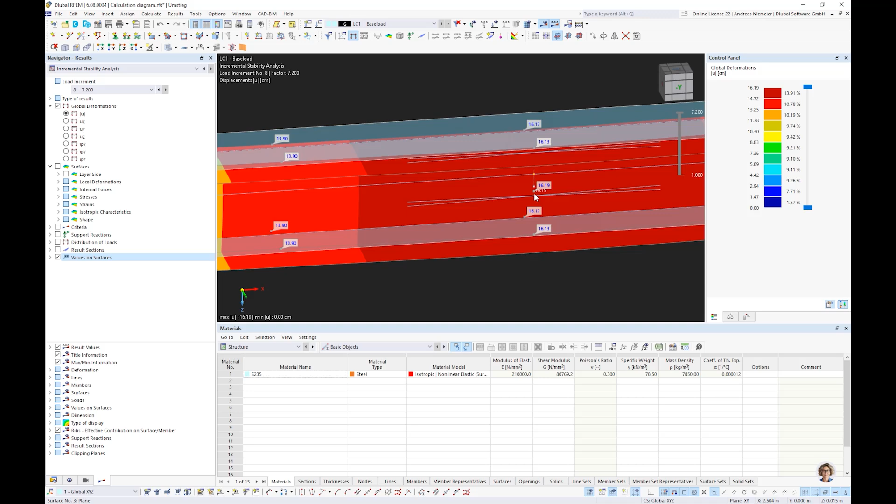So far it's clear. You can have these values here, but why I mention it is something new that was not possible in the old version. You have here a result diagram viewer, where you can say, please document me, for example, in the incremental method for load case 1, in the horizontal axis the load factor, and in the vertical axis maybe the surface equivalent stress Mises, the max one for the web surface, and not for any nodes, but really new, for result points, maybe for the first one.

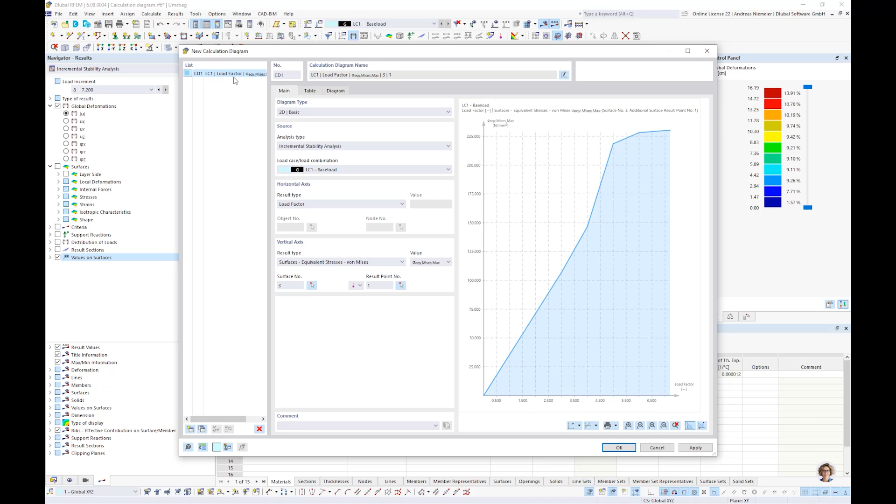And you see now how the load near the support is elastically increased, and then you have this yielding effect. And if you copy this diagram and change it to the second point, you get it also for the second diagram, where it happens really later. And this was always a wish: can I overlay it like in an overhead projector? And now you can do it.

You can make a new diagram with a type group. The program recognizes similar diagrams, and now you have both results in one scheme. You see now the first one, the blue one, and then at some stage the second is also yielding, quite fast. And of course the accuracy of this diagram depends on your steps, but this gives you options to analyze it in a targeted manner. And this is what I wanted to show you.

And this brings me now to the end, and I hope I could show you with these few examples the differences to the old generation and how much work our team did to fulfill all the wishes from the past, besides all the general stuff.